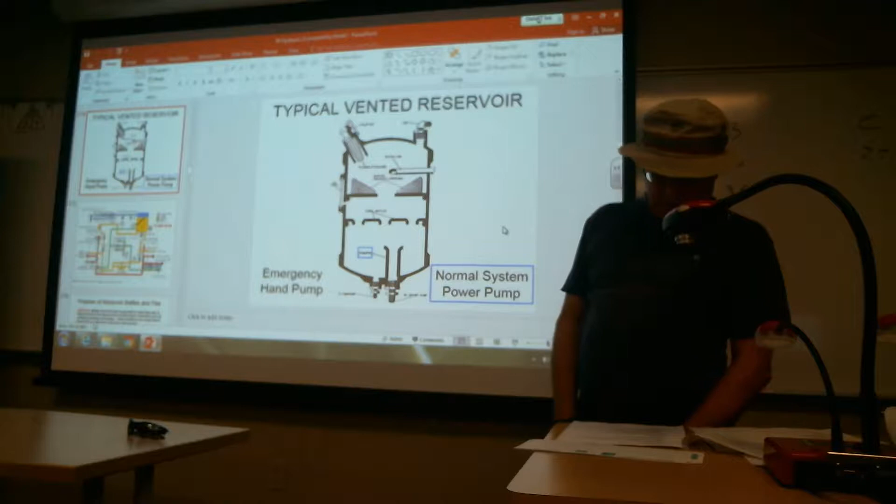27. Some gear type hydraulic pumps incorporate a feature which permits pump discharge fluid to be directed back to the pump. This feature should be for pressure loading. And is that pressure loading the bearings? It pushes on the bushings. Okay, so it's just, I just didn't know the name of it.

Okay, 46. Hold on the picture, what we got. Yeah.

A lot of the gear pumps have something, well, this is a Pesco pump anyway. What they do is they take the discharge of the hydraulic fluid, and then they've got a short bushing in the housing of the pump. The short bushing allows that discharge fluid to push directly on the bushings, and it loads the bushings against the faces of the gear. I got maybe a better picture of that somewhere here.

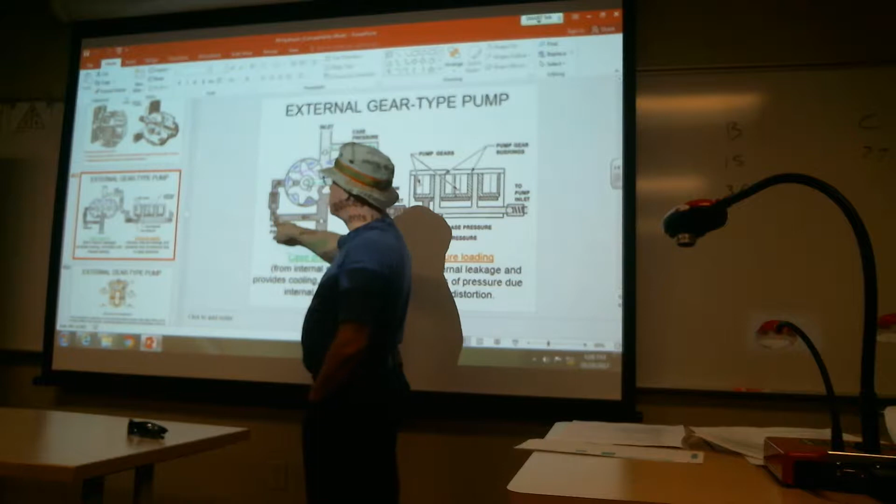So it's called pressure loading. Yeah, it's called pressure loaded. So like in this case, they've got the discharge fluid. What some pumps do is they have the ability to put the head on reversed 180 degrees. So in that case, they've got two check valves. This one allows the discharge fluid to push past the check and then push directly on the bushing. So what it's doing is it's pushing on the bushings against the gear faces.

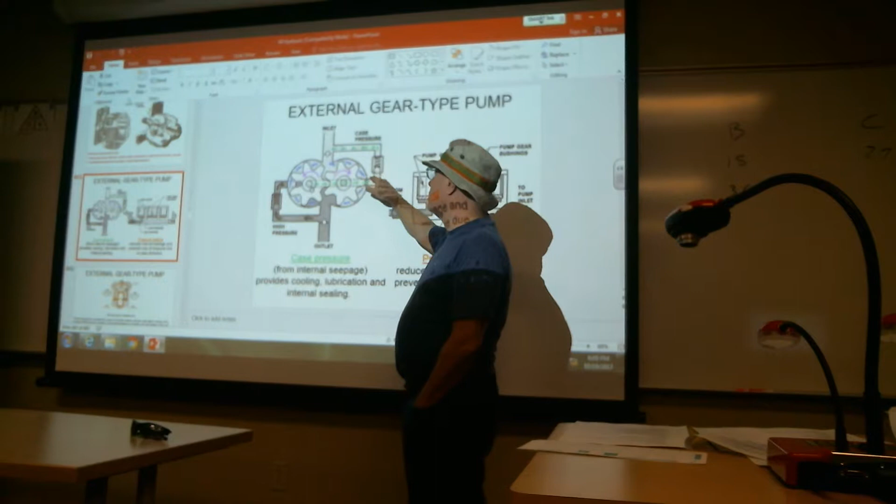The other feature that a lot of the pumps have is for another function called case pressure. We accumulate all the stagnant fluid from the clearances between the parts, and we expose that to a very weak spring check valve internally inside of the pump. This is usually no more than about 15 psi required to offset the ball, and then we divert that fluid back to the inlet. The purpose is to provide for cooling inside of the pump. So it's just an accumulation of fluid that causes that particular check to open.

So how come that question is pressure loading, not case pressure? It's asking about pressure loading. 27C, pressure comes from. Some gear pumps provide for pump discharge fluid to be directed back to the pump. So here's the pump discharge being directed back to the pump, so you're pushing on the bushings, just like they're showing here.

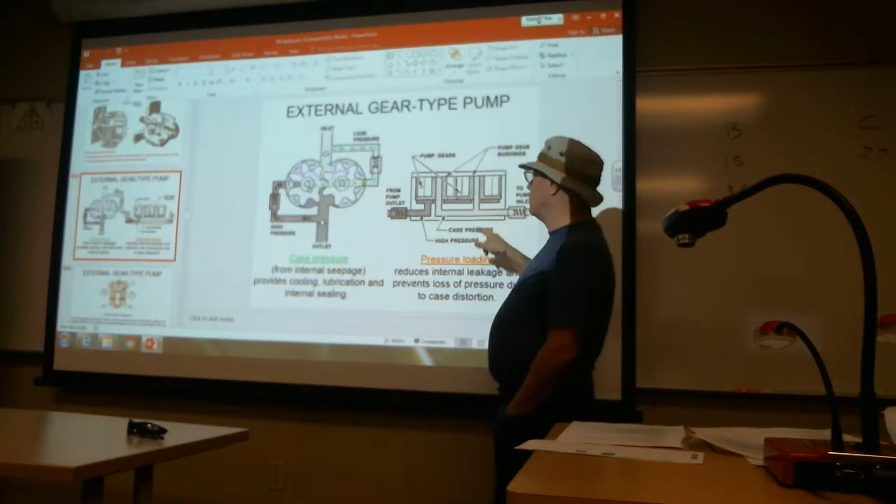There's an annular opening in a lot of the pumps that provides for that.

Number 46 on C. 46 on C. 46. 46 on C. 46 says the diameter in microns of which the largest spherical particle will pass through a filter under certain test conditions defines which filtration rating. That should be absolute. C.

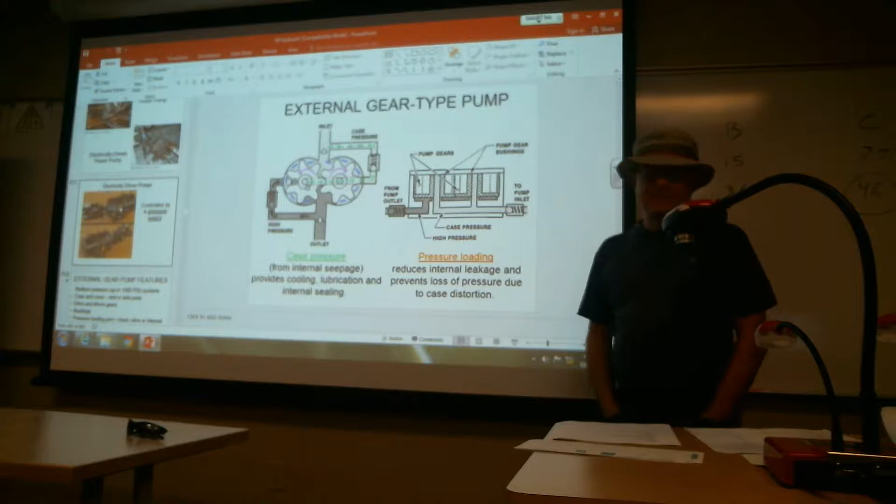It's wrong. Did I get it wrong on that? Yeah, circle it. You caught me. What do I got marked on the test as the correct answer? B. B. B. Okay, should be absolute. Once in a while I blow it too.

B25. What determines the minimum particle size which will be excluded by, or filtered by, a Cuno stack disc edge filtration? You've got a series of discs and spacers. The discs are, that's C.

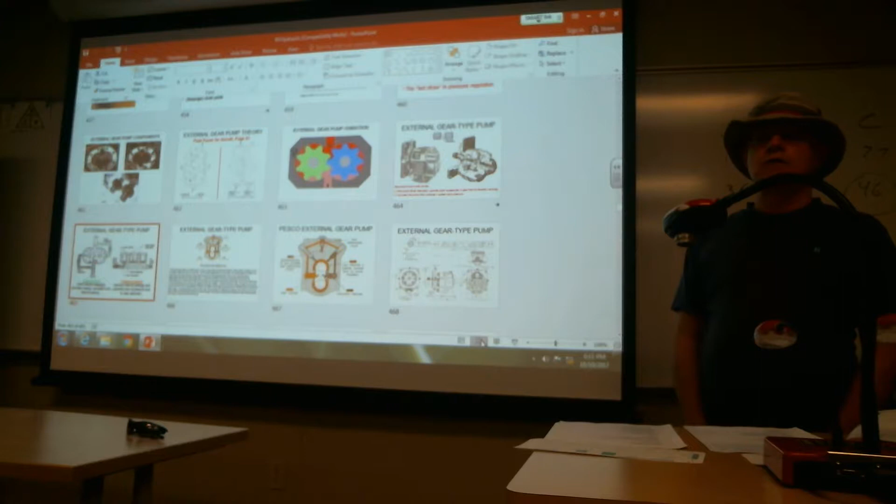I'm sorry? That's 20. Okay, so which question? It's 25. 25 on B. Oh, I'm sorry, 25. A worn hydraulic pump shaft seal can normally be detected by, they've got a seepage drain.

There's a lot of pumps incorporated with it. They've got four ports that are mounted at the flange of the pump, and these are really seepage drain ports. When you see hydraulic fluid leaking out of there, that indicates that the shaft seal is busted. So it'd be hydraulic fluid flowing from the pump drain port.

That would be it. You have D marked on that one. Let's see, 25? I remember. 25, oh, should be, yeah, C. Yeah, it is C. Never mind, I'm reading wrong.

Okay, like at 26. 26. Okay, question number 26 on C. Oh, so it's on B.

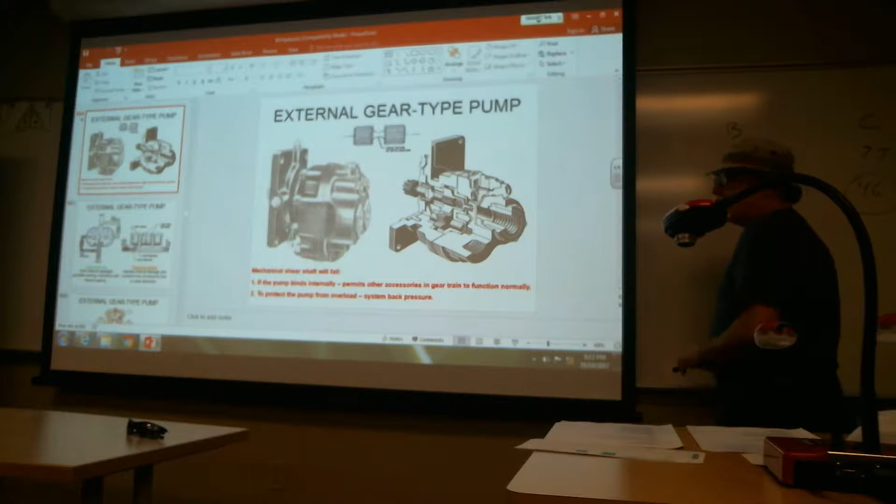B26. What determines the minimum particle size which will be excluded or filtered by a Cuno stack disc hydraulic filter? You've got a series of discs and spacers that are ganged on top of each other with a common rod. The spacers determine the degree of filtration. The discs separate it. So let's see if I've got that for you.

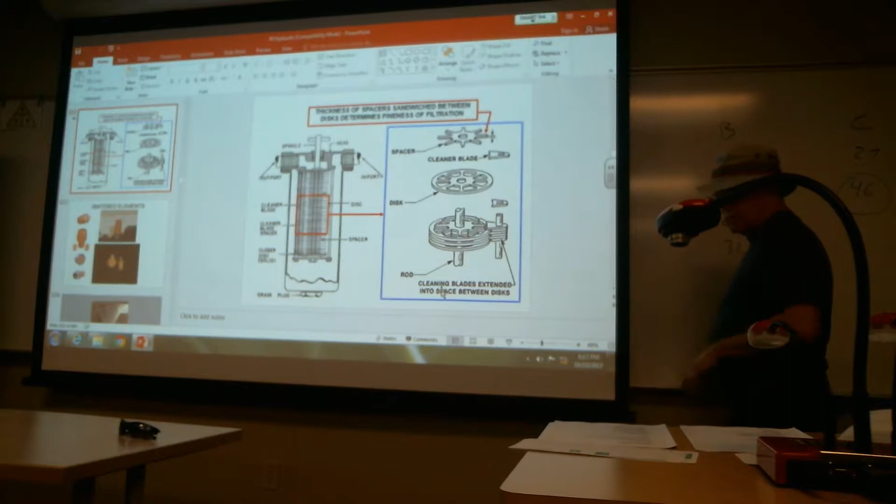You've got a series of spacers and discs. The thickness of these things really determines the clearances you have between the discs, and that's where the particles would lie. So they're razor thin, but nevertheless that lets you control it. What's the spacer? B32. BN32. B32.

Service valves having a high pressure valve core should be the AN812 and the 6287. I thought it was the MS289 — that one has no valve core, only a metal to metal seal. The 812 does not have high pressure in it... actually they're all considered high pressure service valves; the 1500 was the low pressure one. They have different features though: two of them have valve cores, two also rely on a metal to metal seal, but only one has both. The 6287 has a metal to metal seal and a valve core. The 812 and the 6287 both have valve cores.

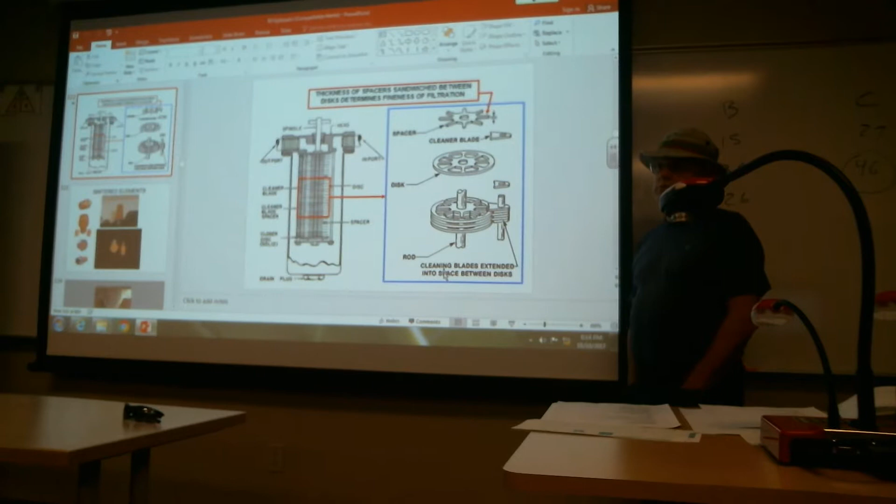47 on C. Before removing the filler cap of an air pressurized hydraulic reservoir — 47 on C, sorry, I got B. Sorry, 47 on C.

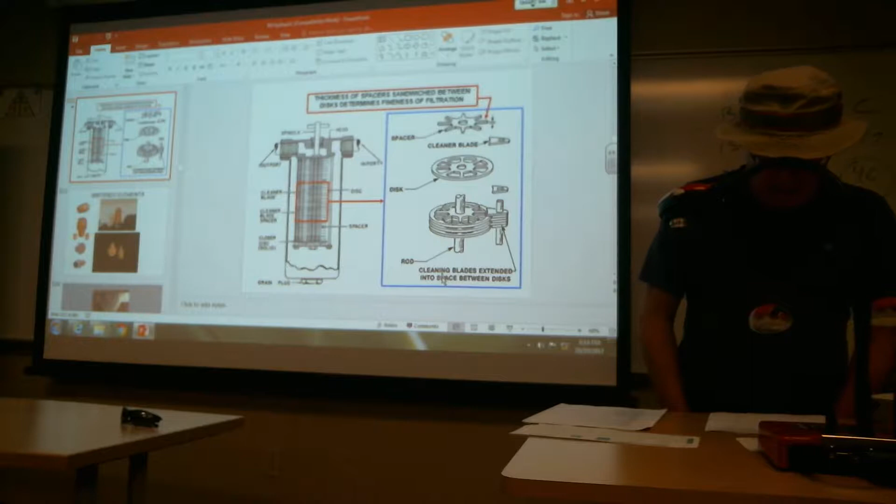47. The case drain of a variable displacement pump provides for heat exchange. The other type of drain you might have on a pump provides circulation of hydraulic fluid back to the reservoir — that's the case drain. A lot of variable displacement pumps have three ports: one is the inlet from the reservoir, another goes into the hydraulic system for the pressure manifold, and the third port goes back to the reservoir. That's what they call the case drain. Let's see if I've got a picture for you.

Let's find — I think you've got another picture somewhere here for you. Number 20, C too. 20, which one, on C? C20. 20 on C.

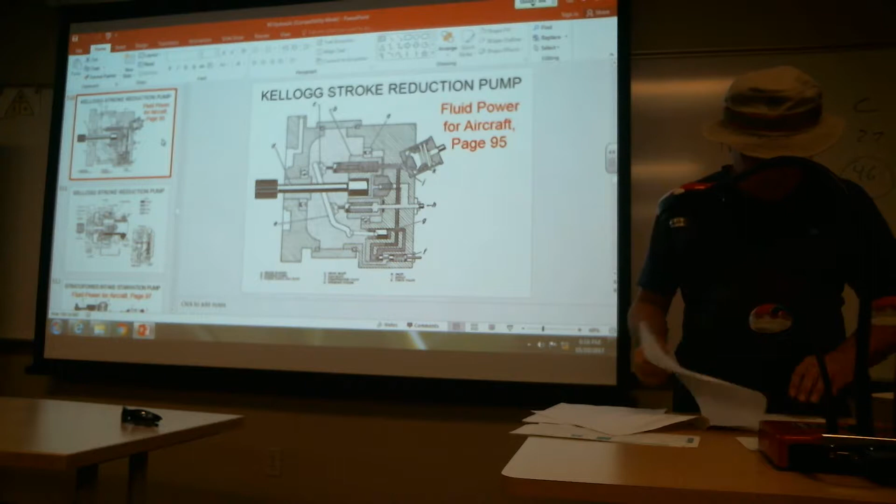C20. Last chance filter — wouldn't it be found in the reservoir too? No. They've usually got either a micronic type filter or a metal mesh filter. The last chance filters are micronic in nature, but they're usually positioned inside servo valves and actuators. You'll never see them in the field. When they do an overhaul of a power control unit or servo actuator, that's where they're found.

Which other one? 3 on B. Sure. B3: what happens to the output of a constant displacement hydraulic pump when the hydraulic pressure regulator diverts the pump fluid from the system to the reservoir? Understand that the volume is still coming out of the pump, but what we've done is taken the discharge of that pressure and reverted it back to the reservoir.

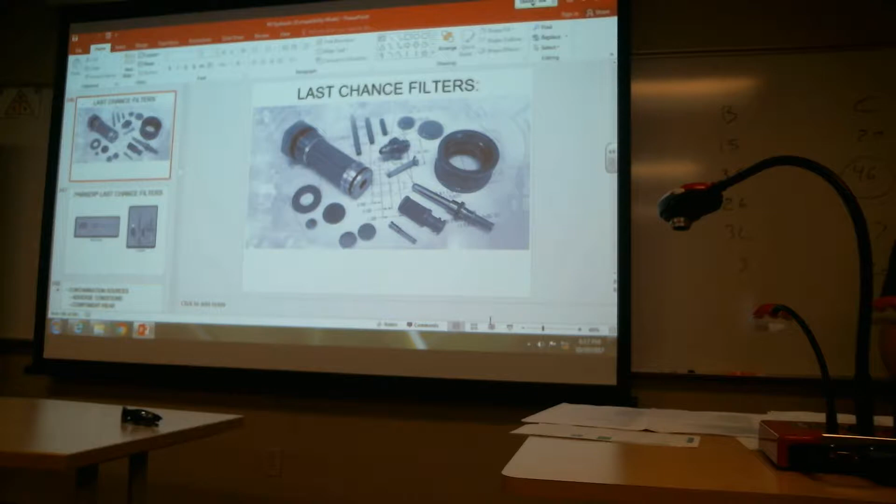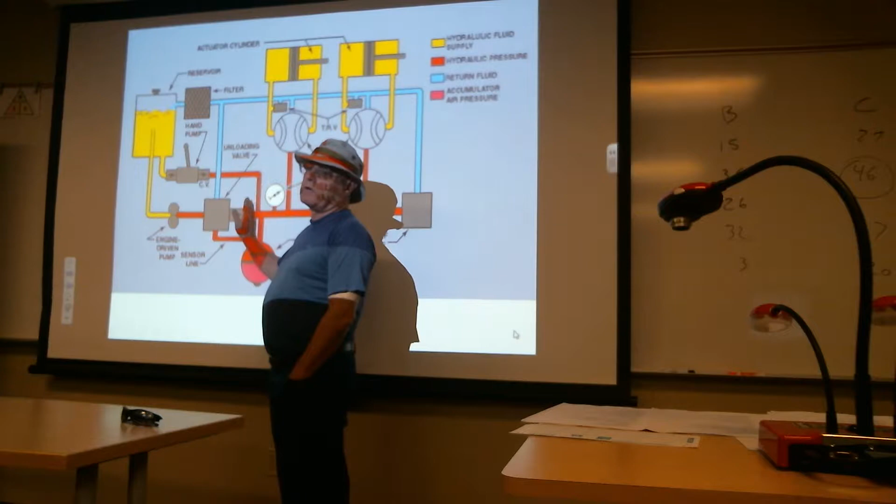So in the kicked-in position for that unloading valve, the pump is actually seeing pressure and you're diverting flow through the unloading valve into the accumulator to build pressure. However, we can't stop the engine-driven pump, it's being driven through the accessory drive of the aircraft engine. So at some point, we have to divert the flow from the pump back to the reservoir. We've reduced the discharge of the pump to 0 pressure, but the volume is still present and coming out of the pump, circulating back to the reservoir. Past this point, we've trapped the pressure past the unloading valve. That's what they're getting at in the question.

21 Bravo. 21 on Bravo. 21 on Bravo.

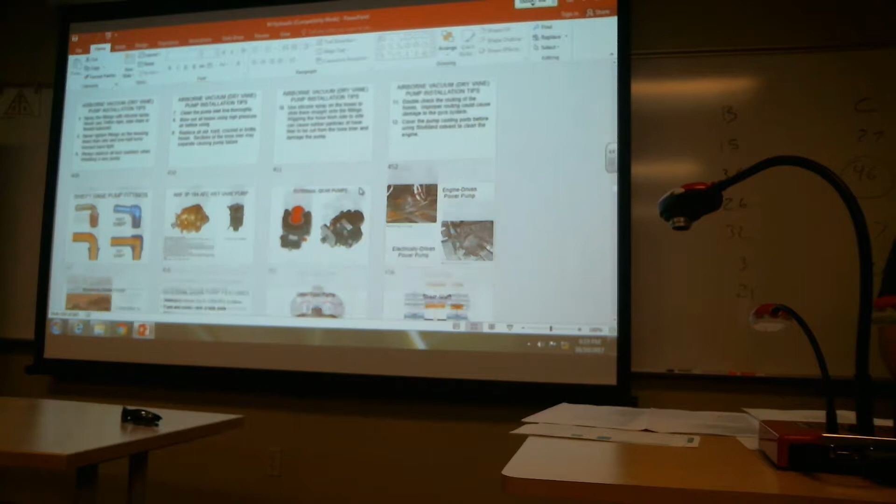21. Reservoirs may have a check valve installed in parallel with the vent to the filter. This is used on the Grumman aircraft landing gear mock-up we have in the shop. They use it in vented reservoirs to allow a large slug of hydraulic fluid coming back to the reservoir to enter as easily as possible. The purpose of the check valve is to expel the air contained in the top of the reservoir, because the filter acts as too much of a restriction to get the air out.

So let me show you a picture. Some filters. Reservoir. It'll be in the vented section of them. If we can find it here. Here we go.

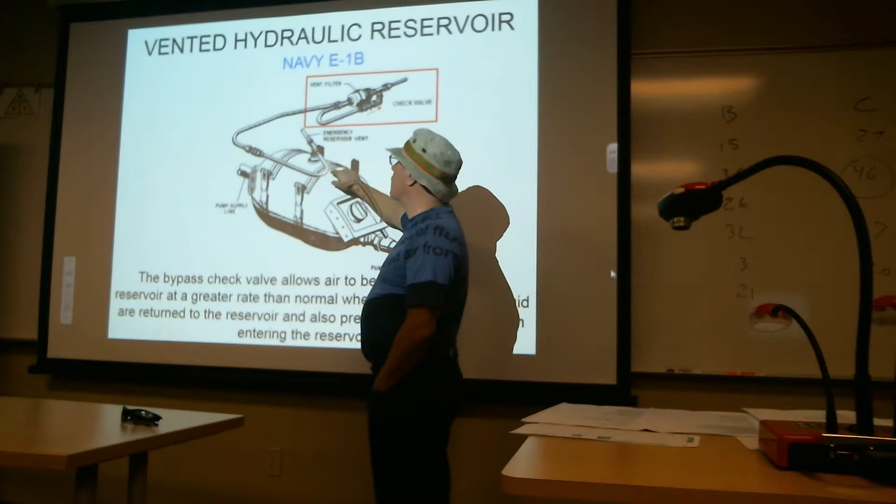So you've got the reservoir positioned here. This is the filter that's in the vent line, so air can go through it, but not necessarily freely. Obviously, the purpose of the filter is to allow filtered air to get into the reservoir, that's not a problem. However, there's a big problem when you have a big slug of hydraulic fluid trying to get back to the reservoir. Whatever air is inside here is going to impede that flow. What we've done is install a check valve that allows the air inside this chamber to vent itself freely. Rather than fight through the filter, which is a restriction, there's a pathway around the filter that lets the air get out. Grumman does it, other manufacturers do it too, I'm sure, but that's why they do it.

If it didn't have that, you'd just put pressure on the pump. The fluid, when it gets back to the reservoir, creates back pressure in the return line, in the return manifold. Because the return portion of the system goes back to the reservoir, you're now adding pressure into the return line going back to the reservoir that you don't necessarily want.

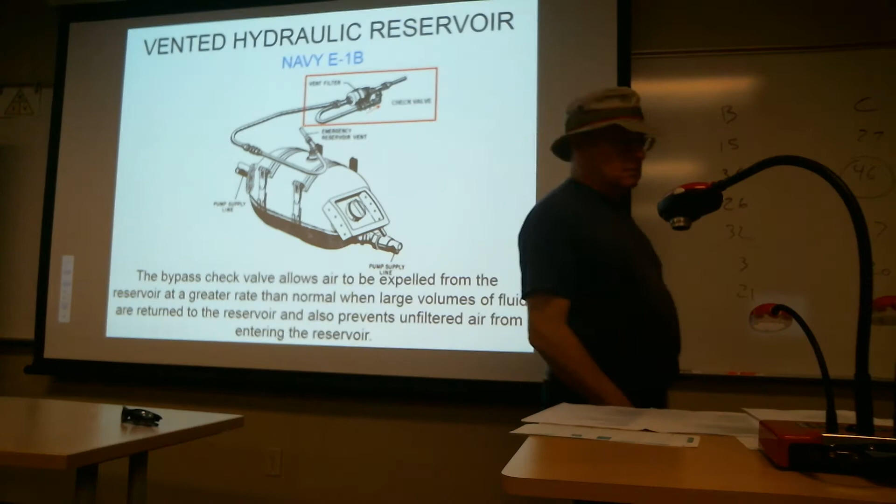43, see, 43 on C. 43. C 43. 43C.

43. Self-displacing accumulators have how many chambers? They've got 4. It's a modification of a piston type accumulator that gives you a storage chamber that will work as a reservoir. It's got a vented chamber as well.

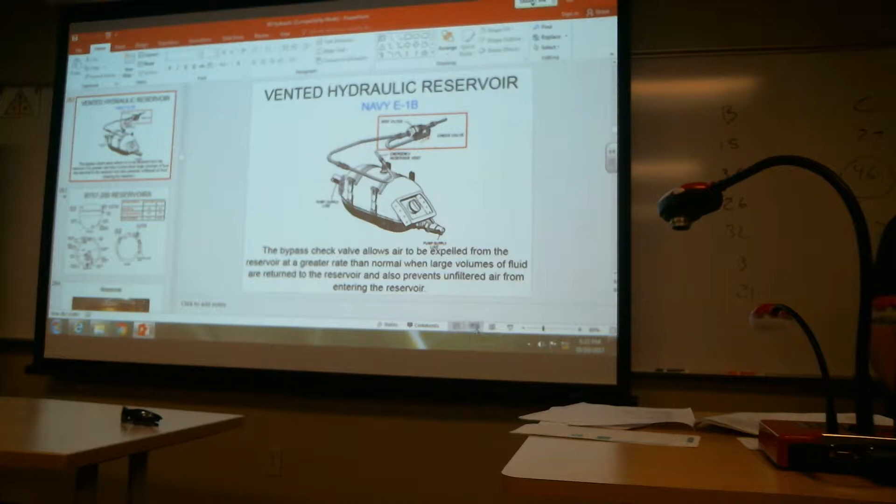Let's see if I can find you a picture. Okay. Inside that accumulator, there's actually 4 spaces. They have a piston that looks like an H in cross section. They've got a gas chamber that's pressurized, just like a regular piston accumulator. They've got a high pressure fluid side, just like in a regular accumulator. Because the piston is oddly shaped, as it goes back and forth there'll be a chamber that varies in size to accommodate fluid, working kind of like a reservoir. And then one chamber that is really a vented area on the accumulator.

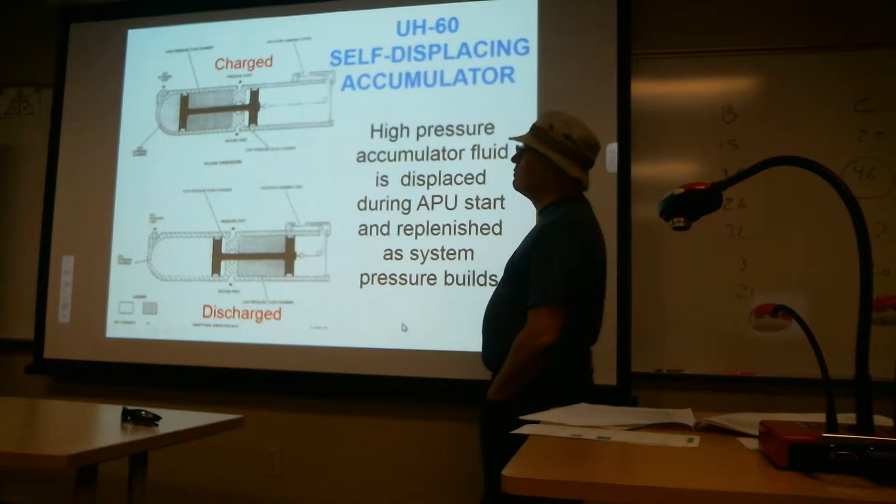To show you the cross section, this is what it looks like in 2 extreme positions. This shows it charged with hydraulic fluid against the gas charge. When the hydraulic system was in operation, we built up system pressure. The fluid came in through the pressure port and reacted against the gas charge on this side of the piston, shifting the piston this way. At the same time, there's a vented chamber open to atmospheric air, but the return side of this piston has no fluid in it.

If we use this as an accumulator to make an actuator work or a hydraulic motor, you're going to be pushing this fluid out. It's got to go somewhere. So obviously, with a regular hydraulic system, that fluid eventually goes into the actuator and is returned back to the reservoir.

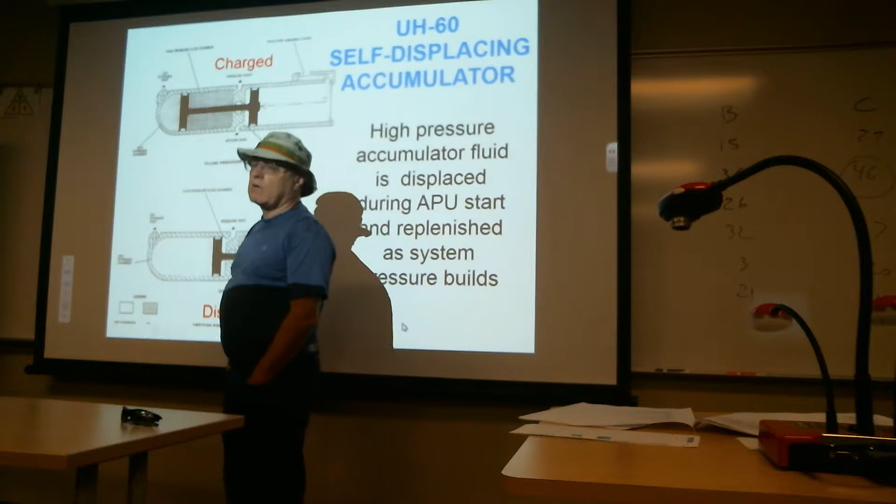But some aircraft don't have a big enough reservoir to accommodate that fluid. So what they do is route the fluid on the return side back to the cavity in the accumulator itself. As the piston is being forced forward, displacing its fluid, the recovery of the return fluid ends up going into that chamber. Does that kind of make sense?

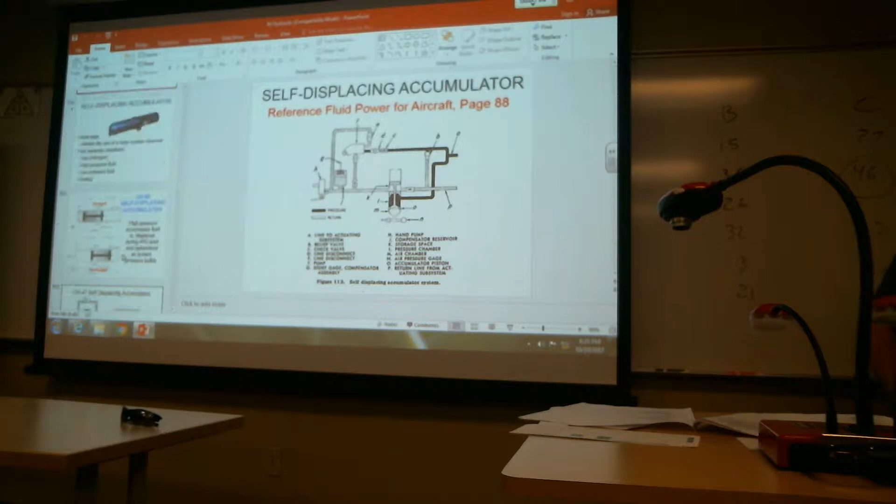Thank you, Joe. Sure. What other questions you got?

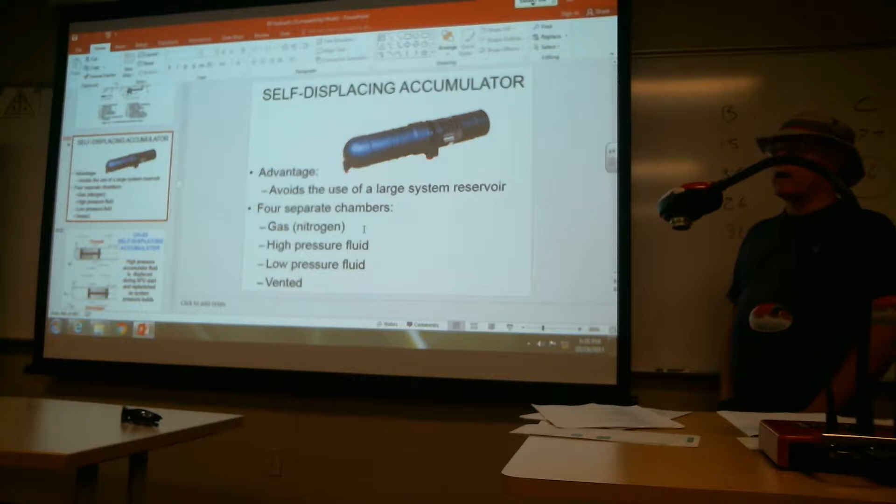On all of the pneumatically pressurized reservoirs, there's some method to remove the air before you remove the filler cap. On the Convair reservoir you have out in the shop, they've just got a spring-loaded poppet. You push that poppet down, that releases the air pressure in the reservoir. Some Boeing aircraft have a plunger that relieves the air pressure on top of the fluid before you open the cap. Any of the others?

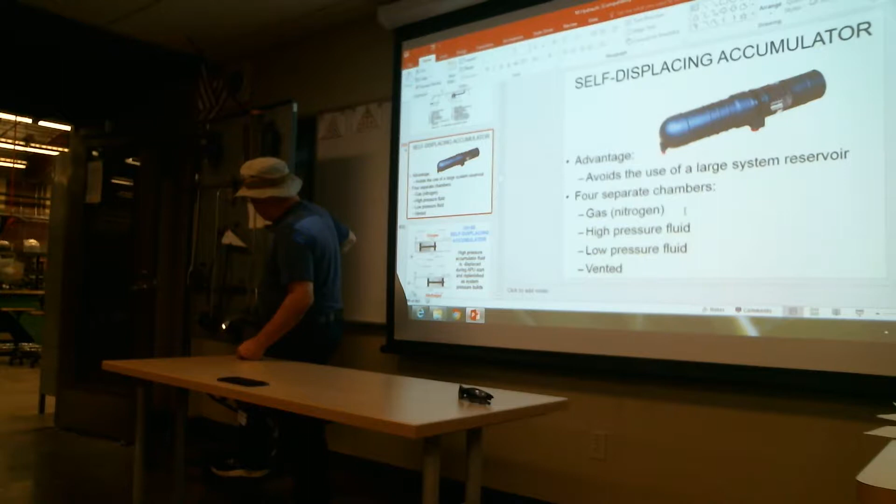This is the reason I brought the mock-up, because sometimes it helps to see what happens. We're getting up to get some fluid into the accumulator, and all we have to do is operate the hand pump to send fluid against the gas charge that's there. Technically, the accumulator is charged.

Is it charged to whatever value we want? No. You certainly don't equal the gas charge that's inside of the accumulator. What you've done is just added a little bit of fluid to get fluid inside of it. So it's technically charged. Okay.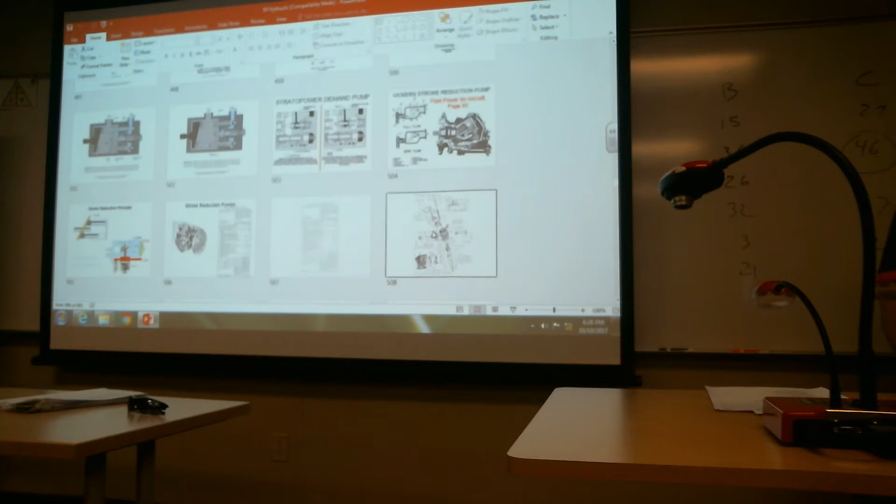So what do we do in order to control pressure? I'll show you a few different things that we can do. Let's see what we can start at here. Let's start right at the very beginning with a really simple hydraulic system.

You've got a reservoir, an engine-driven hydraulic pump, a device called a relief valve, and downstream of it we've got hydraulic pressure being developed in the line going to selector valves. When you operate a selector valve, what you're doing is diverting the flow of hydraulic fluid into an actuator.

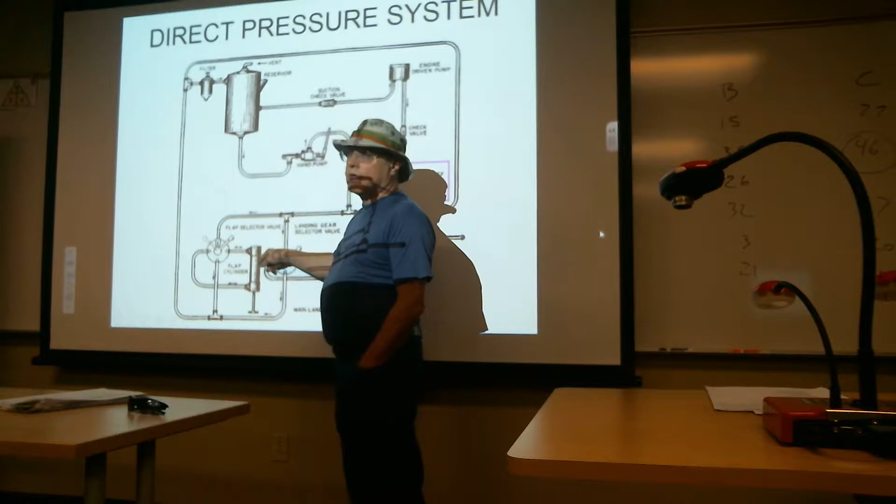At the same time, when the handle has been positioned one way on the selector, the fluid that's on the other side of the piston is being sent back to the reservoir through the return manifold. So, no problem. What's controlling system pressure in this case is a relief valve.

In its simplest form, it's really nothing more than a big ball under a big compression spring. The fluid comes in and pushes against the ball, compressing the spring, and we're fighting that relief valve in order to develop system pressure in the line. Any fluid flow the pump is producing in excess of that is diverted back to the reservoir.

So we're holding a particular pressure in this pressure manifold, monitored by the gauge, simply by allowing a certain amount of fluid forced by the pump discharge to build pressure in the line. Anything in excess of that is sent back to the reservoir.

Understand something very important for the illustration. The pump is fighting to keep that relief valve in a position of partially open, because you're compressing the spring against the ball. So the pump is fighting.

Is this okay? The answer is maybe. If it's a low pressure type of system, it's not going to produce a tremendous amount of wear on the pump. For example, we use something very similar to this to control the pressure for a constant speed propeller.

Many constant speed props have a governor used to control the pressure required for changing the pitch of the propeller. It's pretty simple, but understand the pressures required for changing pitch on the prop, using engine oil as the fluid for changing pitch, are maybe 150, 200, or 300 PSI that you're trying to control.

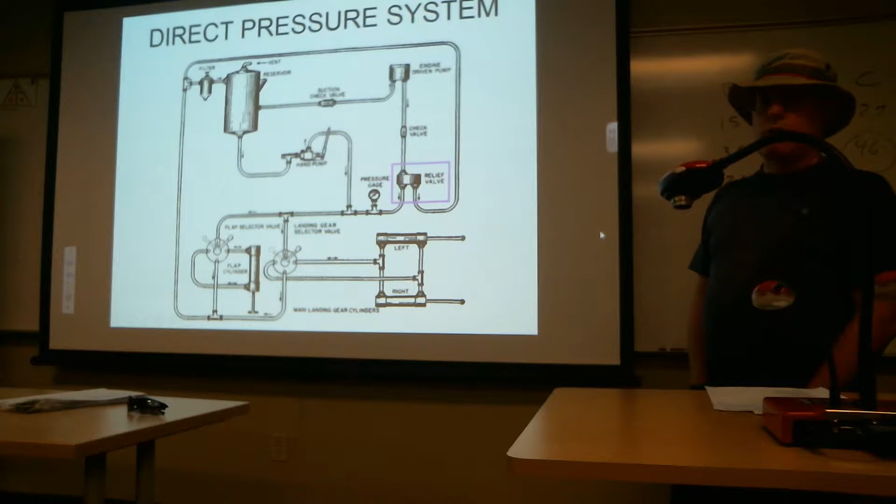Okay, fine, we've got a relief valve in the circuit, but it certainly doesn't unload the pump. Even when the relief valve is controlling pressure, the pump is fighting to keep that relief valve throttled to a partially open position.

Well, this is what they used to do in the old days in order to make actuators work and control system pressure. They had a system called a direct pressure system. What they did was install a plunger type of valve called a power control valve, and used with it is another device called a surge cylinder. This is a semi-automatic method of controlling system pressure.

When the power control valve is in its open position, fluid flow from the engine-driven hydraulic pump just circulates naturally back to the reservoir. However, when you want to build up system pressure, the pilot or somebody in the crew has to push on the plunger, this power control valve. That blocks off the return flow back to the reservoir, and now the fluid under pressure is forced to go through the relief valve and also into the selector valve to make the actuators work.

At some design pressure, this power control valve poppet or plunger will pop itself back out again, and then the flow is established back to the reservoir. So that's why I kind of call it semi-automatic.

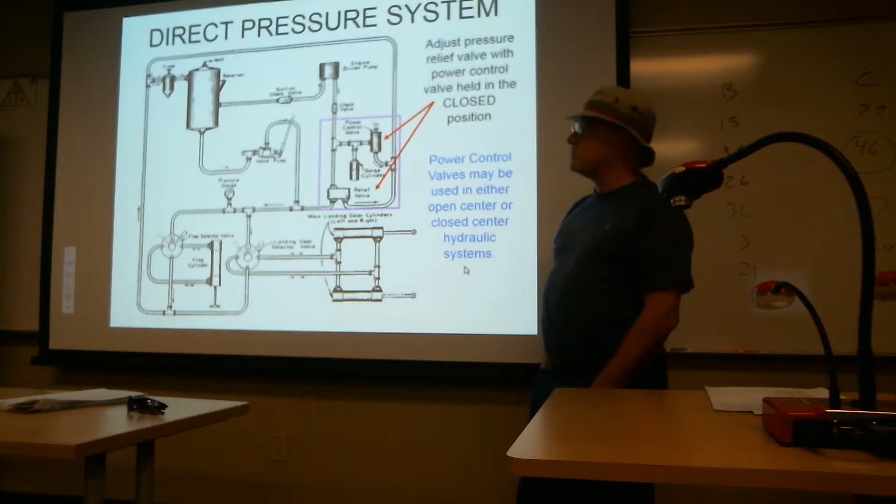This makes life much easier for the pump. The pump probably won't fail as soon as other types of systems where we just build and hold pressure. It's far better than having just a relief valve modulating itself open and closed to control pressure, because the pump never gets a break. Does that make sense?

There's an FAA test question, kind of an obscure one, that still asks about this type of system. They want you to be able to adjust this system, or adjust the relief valve for its opening point. Obviously, to adjust the relief valve for the point at which it opens, you're going to have to manipulate this valve and hold it in the closed position, then look at the system pressure gauge to figure out at what point this valve is going to open.

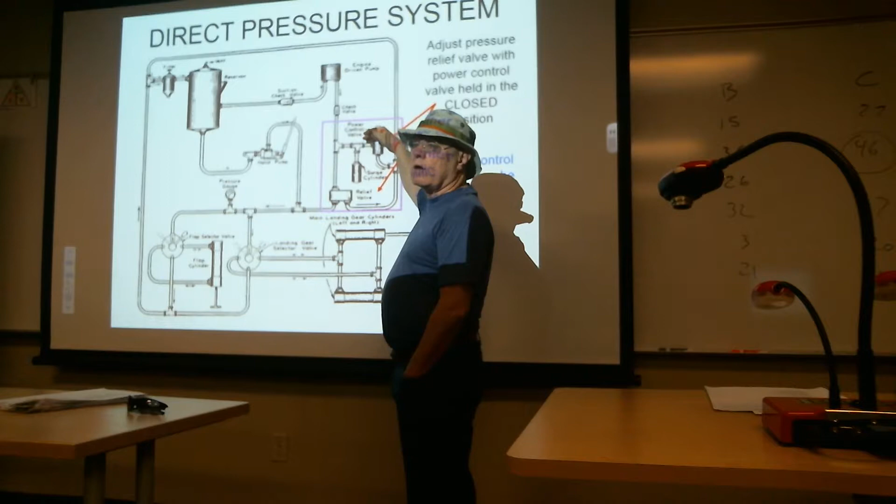So obviously, this device opens at a lower pressure than the relief valve is set to open at — by its very nature, you're going to use it as a safety device. But to tell what point the relief valve opens at, we have to momentarily disable this device by holding the plunger in. When we hold the plunger in, and physically hold it, we build up enough pressure to allow the relief valve to open, and we can verify its point of opening by looking at the system pressure gauge.

So the FAA test question says: adjust the pressure relief valve with the power control valve held in the closed position. Again, you're going to have to hold this in the closed position and keep your hand on it.

We're going to allow the pressure to build up to the point where the relief valve opens. You can see that pressure by looking at the gauge in the circuit. Does that make sense to you?

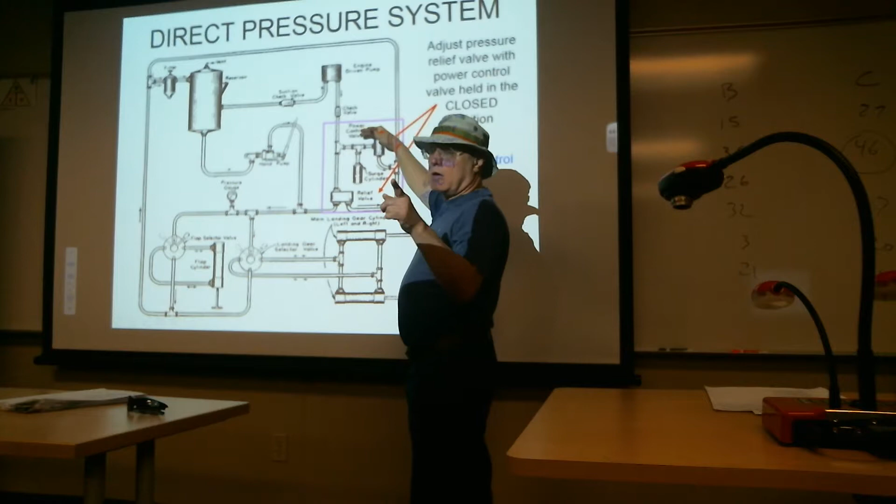Question: do you have any examples of a system like this in an aircraft? Old ones, you'll have to go back to the 1930s, really old. It's too simplistic for modern aircraft, even those built in the mid 1940s. You had one or two hydraulic components you were trying to make work, and that's about it.

But if you've got multiple components, we don't want to use that power control valve just to control pressure. We want something better for controlling pressure and to unload the pump as well, like an unloading valve. That's where we're going. Is there a spring that works against the plunger?

Yes. If you want a close-up view, you've got this picture in your fluid power book. This is one reason I use that book, because it covers some really obscure things. This is a picture I stole directly from it. What it's got inside is the plunger, shown in both positions. The system pressure has to work against this poppet or plunger.

There's a spring on top that holds it in one position. When the pressure builds up, it pushes the plunger out, and the fluid flow from the pump is directed back to the reservoir. In its closed position, you're just blocking the reservoir. But understand, this device alone isn't enough to guard you against a spike in pressure.

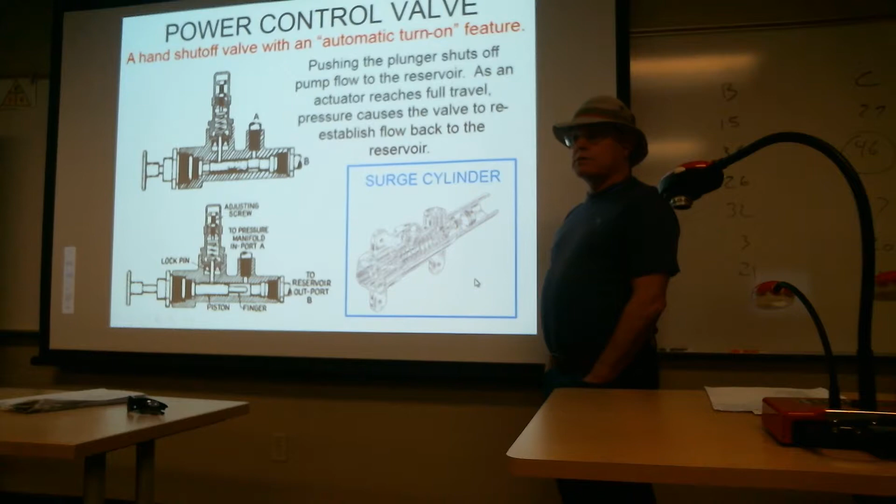You're going to need a surge cylinder also. I don't know if your fluid power book has a picture of this, but I stole it from another text. This has just got a big spring in it with a piston. What it does is prevent this thing from switching to the open position too quickly, so when a surge of hydraulic fluid develops, it holds it in the closed position.

There used to be a really obscure FAA test question asking what the purpose of that power control valve was, and it says: the hand shut-off valve with an automatic turn-on feature. Really what it does is shut off the reservoir and then automatically turn back onto the reservoir when the pressure builds up. But that's the purpose of the power control valve, right?

Does it unload the pump? The answer is yes. Is it completely automatic in operation? No. So it allows us to develop a particular pressure, and it does unload the pump, but it's not automatic.

What's a better thing? We're now going to use a device that's pretty much all automatic, called an unloading valve. We're still going to have a relief valve in the circuit as a backup in case the unloading valve fails to go to a position called kicked out. But we won't be damaging the pump by continually having back pressure felt at the discharge of the pump. Once we build up pressure, the unloading valve senses that pressure and diverts flow from the pump back to the reservoir.

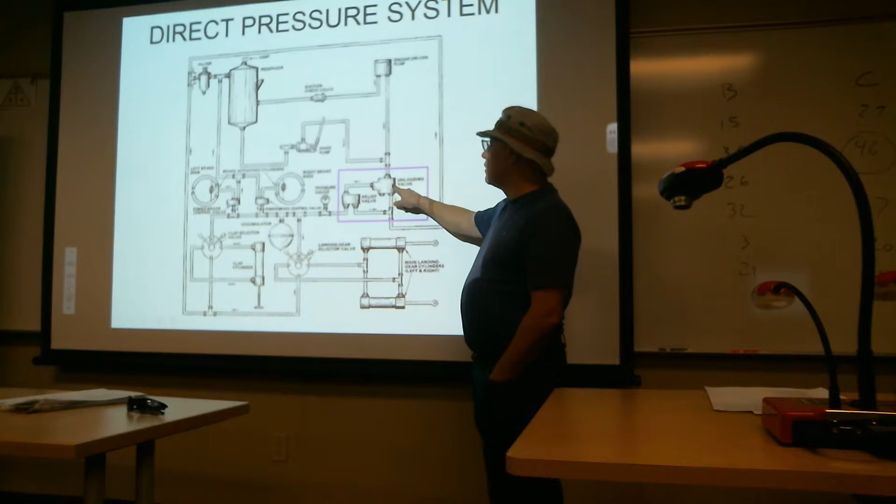So take a look at it: you've got all the same components as before, but a little more sophisticated. You've got a reservoir, the same engine-driven pump, and an unloading valve. The unloading valve works similarly to the relief valve, except it's called an unloading valve because it takes the back pressure off the pump discharge once system pressure has built up downstream. At a certain point, the fluid flow goes through the unloading valve, unrestricted, finding a path back to the reservoir.

So it's automatic. We're still going to need a relief valve in the circuit as a backup. If the unloading valve fails to divert the flow back to the reservoir at the correct time, the relief valve will control system pressure. But notice also that the relief valve does not unload the pump.

When the unloading valve has failed, the relief valve will control system pressure to a value above the unloading valve point of pressure. However, the pump is fighting to keep that relief valve open. So it's just meant as a stopgap measure, necessary to a point where we can replace the unloading valve. But we need it. We need to have that in the event that the unloading valve fails.

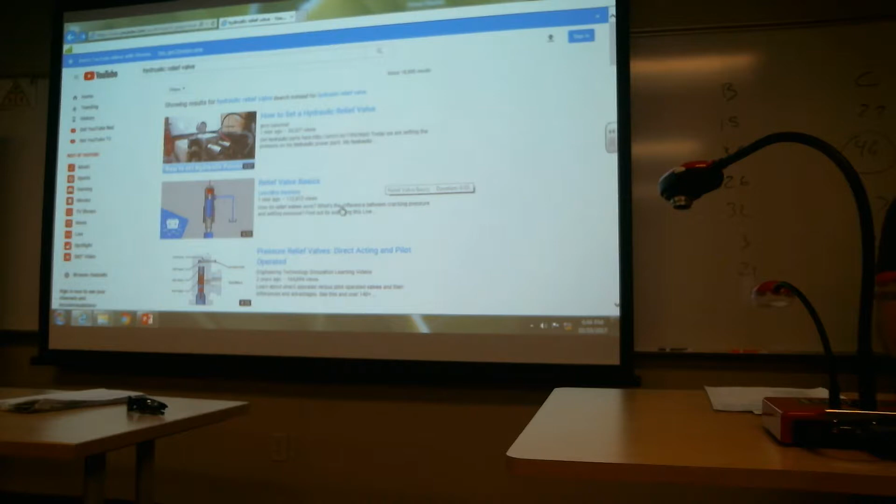Okay, all right, so that's kind of where I wanted to go. Even before we get there, during your exam I had a chance to take a look on YouTube, but I didn't really have an opportunity to listen to the audio being presented. Maybe just something really simple on relief valves, on what they do. Let's take a look at this real quick.

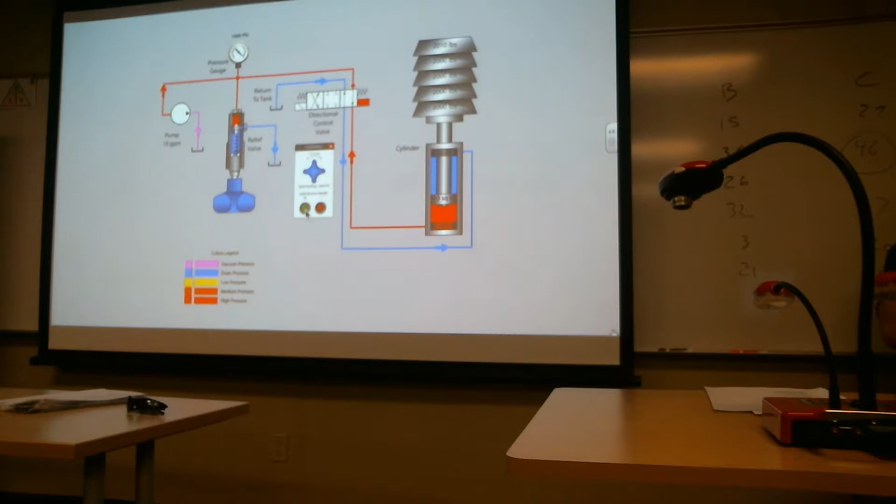In future videos, we will examine pressure override in more detail and look at more complex relief valve designs. This is kind of important to note too.

Regardless of that relief valve setting, if you've screwed the relief valve spring all the way in, the pump is under load. You're not really controlling the discharge of the pump to the point where it's unloaded. If you put a lot of compression on that spring, whatever pressure builds up in the line might be enough to actuate the actuator. But that pump is working against that relief valve to hold it open. So you may be sending fluid back to the reservoir, but the discharge of that pump isn't helping it, and it eventually will cause the pump to wear out.

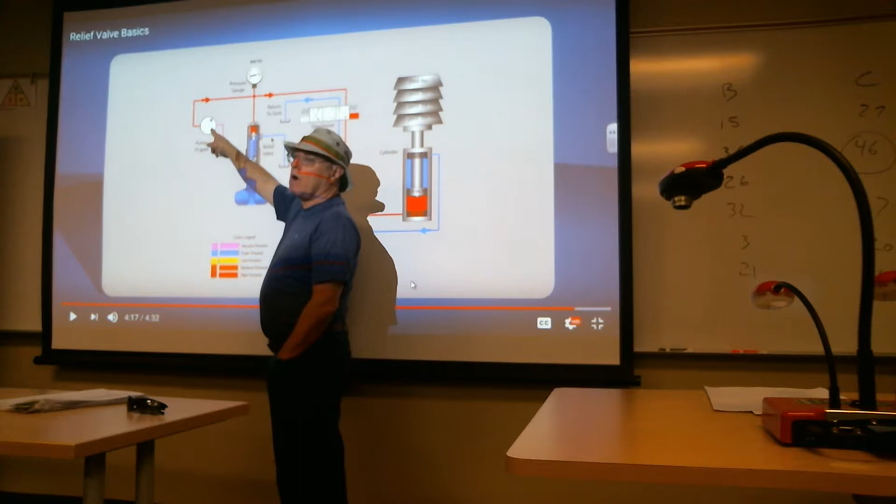So this is the reason why we need to have an unloading valve in the circuit. Y'all kind of see that? Okay, all right.

Here's a more sophisticated system that we might have. You've got an unloading valve in the circuit designed to unload the pump. You've got a system relief valve that works as a backup in the event the unloading valve fails to control pressure. And we've also got other valves called thermal relief valves, abbreviated TRVs. They're kind of like miniature system relief valves, but designed to protect the actuators. And I've got to remember to raise the board.

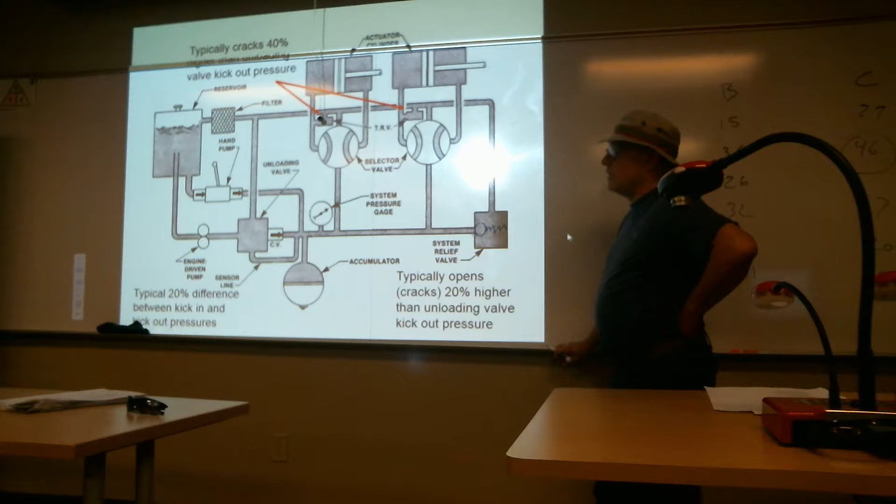So if we were to do something like this, you can kind of envision what's happening with the relief valve. In its simplest form, it's a spring against a ball. The unloading valve is much more complex - there's a balance of pressures and forces used internally.

In one particular position of the unloading valve, flow from the reservoir goes through the pump and in through the unloading valve, then begins to build system pressure by confining the fluid inside the pressure manifold. This is the position of the unloading valve that we call kicked in. So in this position, the flow from the pump is being diverted into the pressure manifold, and we build it up to a certain point.

The other point the unloading valve has is called the kick-out pressure. At the kick-out pressure, we're going to divert the flow from the pump back to the reservoir. Past this point, past the check valve in the circuit, you're going to hold pressure in the pressure manifold and in the accumulator. But what this has done for you is it's now unloaded the pump, so now the discharge of the pump is circulating back pretty much unrestricted.

This is desirable - it'll prolong the life of the hydraulic system, particularly the pump. So it's not like using a big spring and a ball to control system pressure. You're working internally against components or piece parts inside the unloading valve to hold it in the kicked out position. I want you to take a look at the picture as well - there's a helpful device that holds the unloading valve in the kicked out position, and I think you can guess what it is: the accumulator. The accumulator works just like a battery in an electrical circuit.

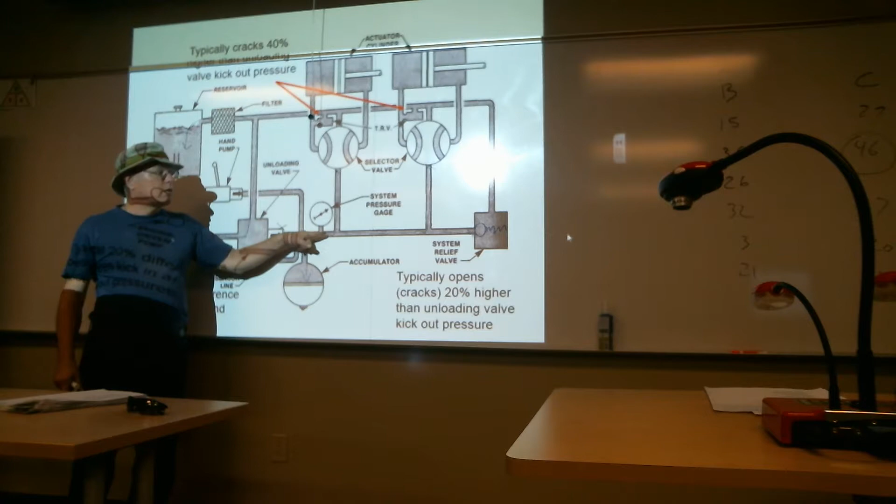So let's assume we're in the kicked out position and we've got flow going back to the reservoir from the pump. You've now built up pressure in the pressure manifold. When you operate a selector valve, what you're really doing is bleeding the pressure out of the accumulator, and then making the actuators work. The fluid flow comes out of the accumulator into the pressure manifold, and then the actuator works. The displaced fluid from that pressure manifold eventually goes back to the reservoir. But really, you're using the accumulator in the circuit to do that - it's like a battery in an electrical circuit.

Eventually, you push out enough fluid from the accumulator that the unloading valve sees it as a drop in pressure. At that point, the unloading valve replenishes the pressure in the accumulator and goes back to the kicked in position. Eventually, the unloading valve will go back to the kicked out position once pressure has been built up. This is a desirable feature we need - some kind of stabilizing device that prevents the unloading valve from switching back and forth between kick in and kick out too frequently. The accumulator helps prevent the unloading valve from flip-flopping between kick in and kick out too quickly.

So just like you have a voltage regulator in an electrical circuit with mechanical relays, three relays inside of it, this does the same thing. What it does is it prevents this unloading valve from working itself to death.

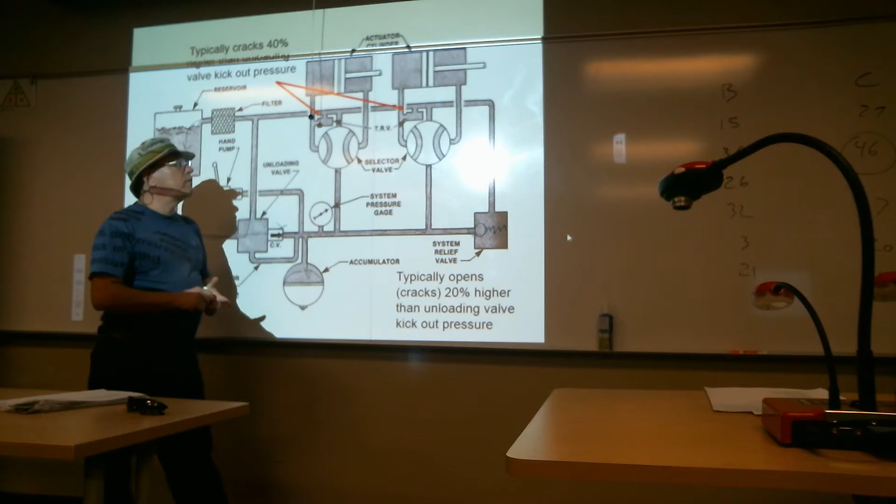So this is what we have, the TRVs, the thermal relief valves. The thermal relief valves are a miniaturized version of the system relief valve. If the selector valves are in the off position, and this is a closed center hydraulic system, there's the potential that fluid trapped in the actuating lines or inside of the actuators will begin to thermally expand. If there's a source of heat energy next to the actuator, that heat will cause the liquid to expand, and if there's nowhere for it to go, the pressure builds up beyond the extreme point.

So what we have to do is vent that fluid out. We have a valve called a TRV, and really all it is, is another tiny little ball but with a really heavy spring. The idea is that the fluid should thermally expand, and all it takes is just a drop of fluid to go by the valve and the pressure will subside again.

But it's a necessity. If the valves are in the off position as they are now, there's no natural return path for that fluid to escape. So what we need to do is incorporate those devices as protection for the actuating lines and also for the actuators themselves.

Remember also, it really isn't directly heat. Although they're called thermal relief valves, it isn't really heat directly that's causing the valves to open. It's the consequence of pressure buildup as a result of fluid expansion from the heat that makes the valve work. Does everybody kind of see that?

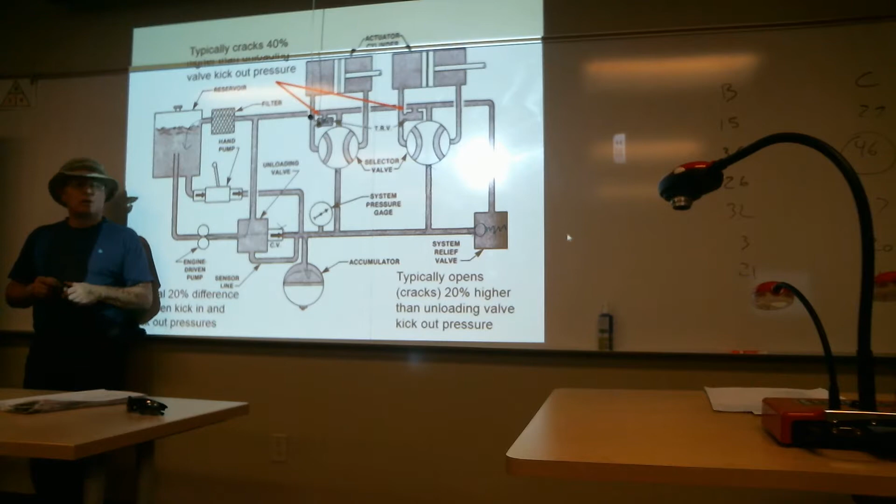If you were to kind of freeze frame the system relief valve, if the unloading valve had failed, let's say this thing is stuck in the kick-in position, this thing is going to be chattering itself to death because a slug of fluid is going to be going by it, the pressure goes up, the spring compresses, the ball comes off of its seat, the pressure subsides, the ball comes back on its seat, and the process repeats itself so repetitively that eventually the relief valve is going to wear itself out.

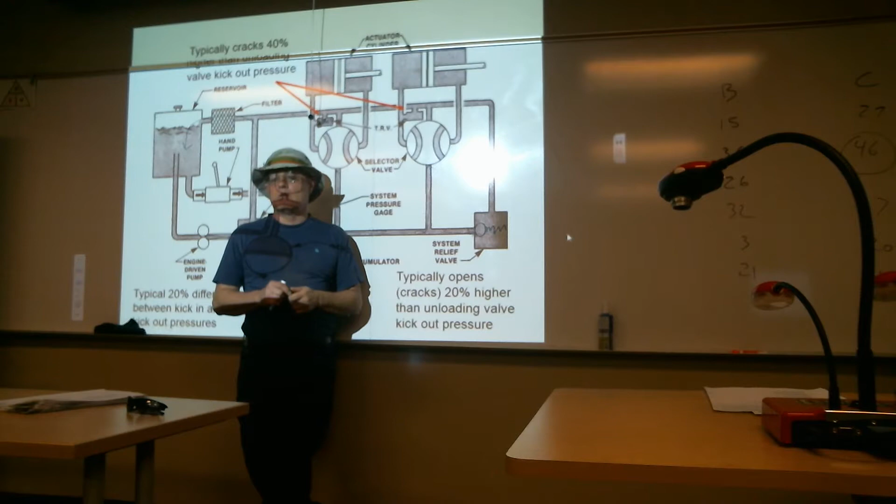But again, the system relief valve is a stopgap measure in the event that the unloading valve sticks in the kicked-in position. We have to have it. So that's how it works. I've given you some generic values for operation of the system as well. There's usually a range of operation for the unloading valve that's designed to work in.

So let's say we've got a kick-in pressure of maybe 800 psi. Once the pressure goes down below 800, the unloading valve will go to the kick-in position in order to build pressure back up. And we've got what we call a kick-out pressure of maybe 1,000 psi. So the unloading valve kicks out at 1,000 psi, but the pressure's got to drop in the line to maybe 800 psi before it goes back to the kicked-in position. So we've got a differential of maybe 200 psi, about a 20% difference in pressure between the two.

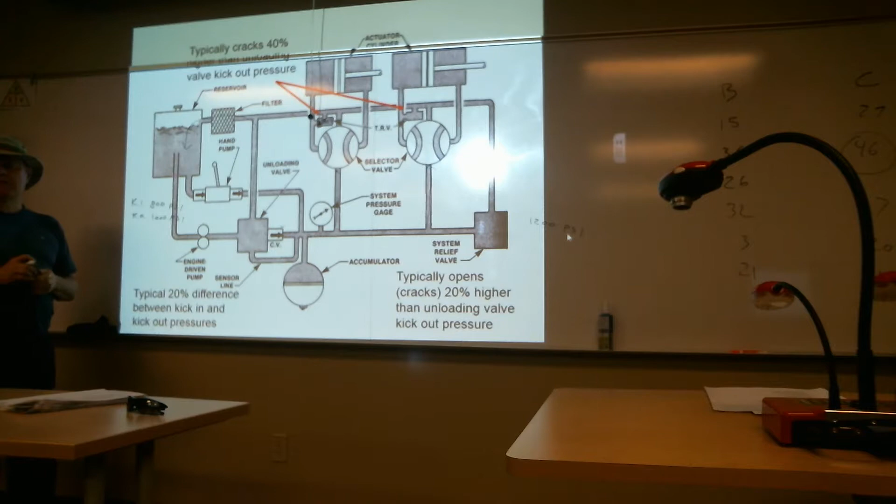The relief valve is designed to open as a backup, so its point of opening has to be higher than the kick-out of the unloading valve. So we might have the cracking pressure, the very point at which the relief valve opens, set at maybe 1,200 psi, about 20% higher than what we had for the kick-out of the unloading valve. But again, by its function, it has to be set to open or crack itself open at a pressure higher than the kick-out of the unloading valve, so again, about 1,200 psi.

The thermal relief valves are set even higher. You might find that if the system pressure is designed to be established at 1,000, the TRVs are designed to open maybe at 1,400 or 1,500 psi each. So again, that's kind of how the circuit has to work.

Questions? Any questions that you kind of have? So just to kind of verify that you know what's going on, the unloading valve, it unloads what component?

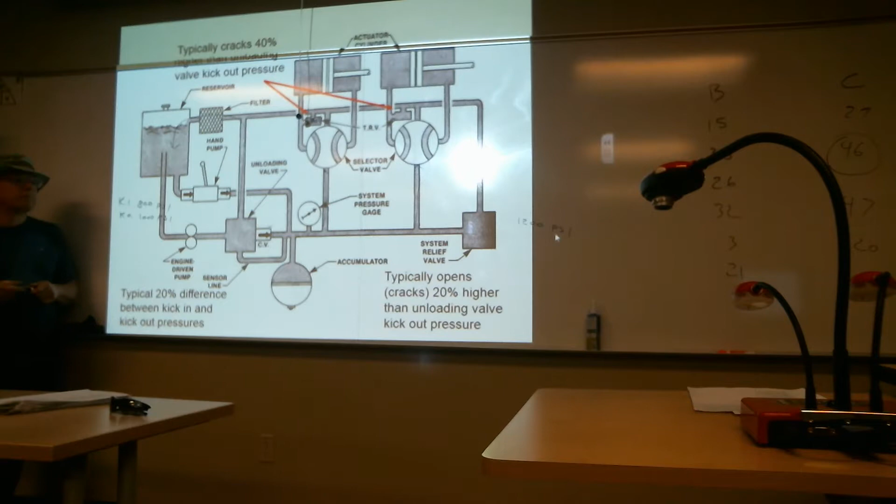Does the relief valve control system pressure? The answer is yes, it could. But does the relief valve unload the pump? No. So when the relief valve is controlling pressure because the unloading valve has failed, the answer is no. It will control pressure to a higher value, but it does not unload the pump. And that's really the important thing with high pressure systems. We have to find a way to control the discharge of the pump.

What do they do on electrically controlled systems or electric pump systems? They'll use a pressure switch in order to control the pump. But it's done indirectly. Really, the pressure builds up, cuts off the electric motor, and that controls system pressure. Will they still have a relief valve in the circuit as a backup? Yes. So if the switch contacts on a pressure switch fail in the closed position, you're still going to have something that will control the ultimate system pressure. Would that relief valve really work for a long period of time? No. It's a stopgap, just to prevent the system from blowing itself up.

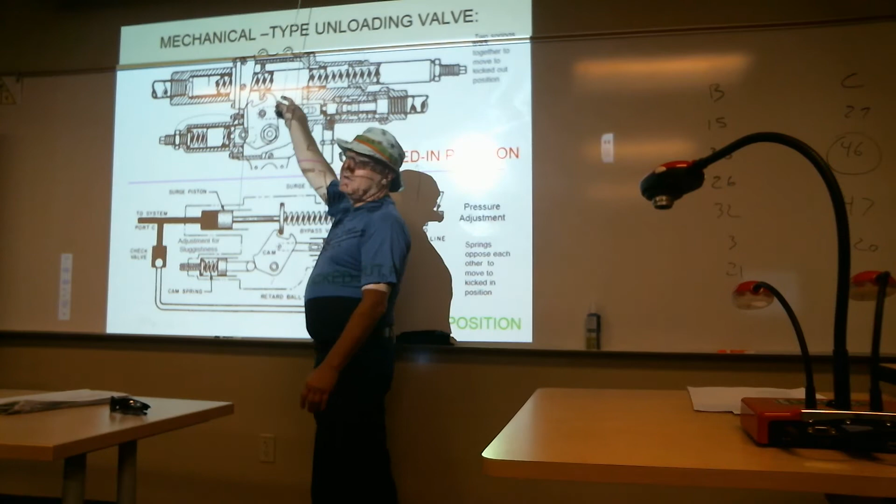Let's talk about different types of unloading valves. You are probably never going to see this particular type of unloading valve. It's a purely mechanical type of unloading valve. It's got a lot of piece parts in it. It's considered to be too complex by today's standards. But this shows you the internal piece parts of that mechanical type of unloading valve. You've got a plunger or a piston inside of it that sees system pressure.

You've got a big spring behind it that the system pressure has to work against. You've got a check valve that isolates the reservoir and traps system pressure on one side of the unloading valve. You've also got a cam, with a high spot on the cam, and the cam is loaded against a follower with a spring on the other side of it. The pivot point for the cam is located here.

This position of the unloading valve shows you what they call the kicked out position. What that means is we've trapped pressure in the accumulator. Any flow being delivered from the pump is diverted back to the reservoir. So we've got a flow path that comes in from the pump, it goes around this valve that they call a bypass valve, and it goes back to the reservoir.

Until the pressure drops off behind this piston enough, we're going to continue to have the flow being sent back to the reservoir. If the pressure drops off in this line, the spring pushes the piston back, and the cam is now positioned on the other side of the hump, of the high spot. This little connecting part attached to the spring will ride over to the other side, just like you see over here.

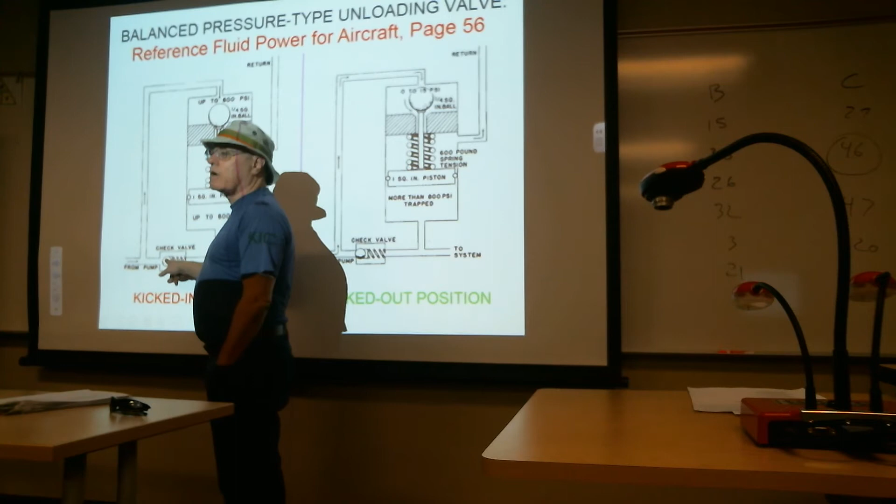What they're telling you is that for pressures underneath 800 psi in the system circuit, the unloading valve will stay in the kicked in position. So what we're doing is allowing the flow from the pump to go past an internal check valve inside of the unloading valve, and then the fluid flow from the pump is being diverted into the accumulator.

As we begin to build pressure, you'll have a pressure that's forcing this piston up. But what they're telling you is until we reach about 800 psi, there's not enough pressure or force in order to compress the spring. So we continue to build pressure.

What's also happening at this time? The pump is displacing fluid into the accumulator. The fluid flow from the pump, at whatever pressure is created at a given time, is also working on the surface area of this exposed ball that's inside of the unloading valve.

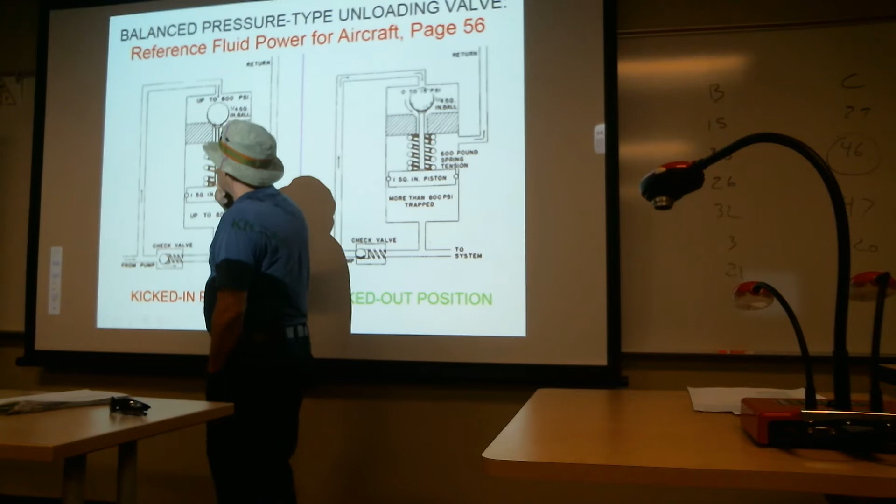So what we can take a look at is this: we've got a certain force that is holding this ball down on top of its seat. We've also got another force that is pushing down as well, which is the spring. We've got another force that is working this way against the piston. So we have one force pushing down against the ball, another force which is the spring pushing down, and one force that is pushing up against the piston.

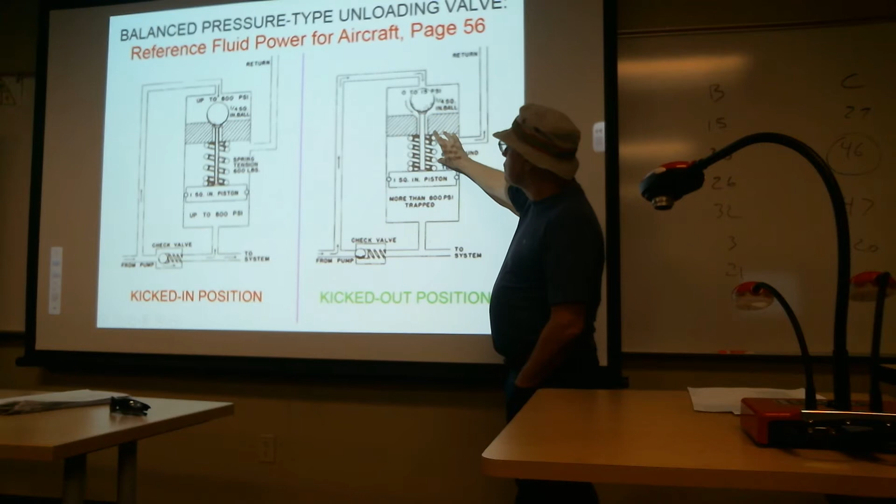Let's look to see what happens in this case when pressure goes up above a certain point. You've now got more force pushing up than you had pushing down. So in this case, let's just assume we get right to 800 psi. You've got 800 psi that is pushing up on top of the piston. The spring was worth a force of 600 pounds, but you can take a look at what was happening over in this position.

This has got a surface area of 1/4 square inch. What's 1/4 of 800? How much is that? 200. So here's 200 pounds of force, and here's another 600 pounds of force. We'll assume that we've got a total of 800 pounds that is pushing down.

In this case, you had 800 pounds that's pushing up. So it's kind of balanced. You're right at the teetering point of this thing, kind of going to the kicked out position.

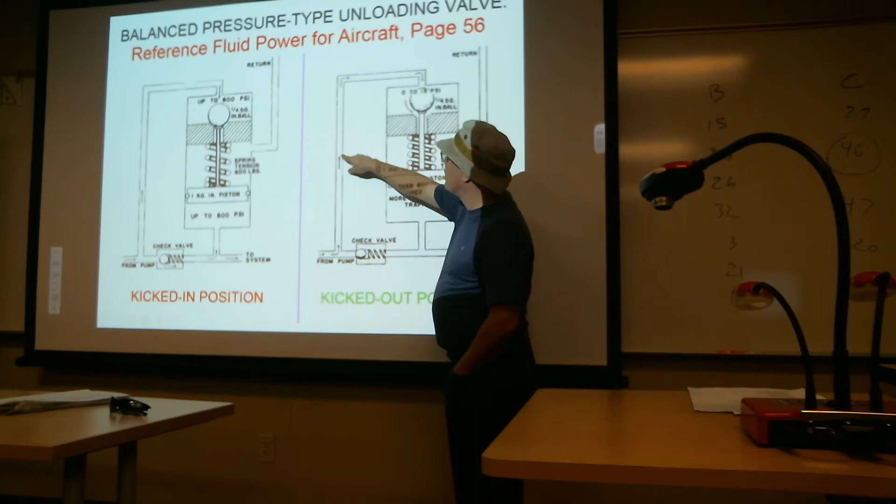As soon as you get to a slightly higher amount of pressure, the piston is pushed up, the ball has been pushed off of its seat by this rod, but most importantly, you've lost the force that was holding this ball down against the seat. The fluid flow that was coming from the pump has got a way to pass around the ball and circulate back to the reservoir unrestricted. So now you've got a flow path that's going back to the reservoir, and you're in the kicked out position.

Well, when will the unloading valve go back to the kicked in position? We would have to drop the pressure in this chamber in order to allow this ball to come back down. But here's the interesting thing: in the picture they're showing you for kicked out, you don't have any force that's pushing down on top of this ball. So you've got 800 pounds per square inch pushing up against 600 pounds pushing down. So I would ask you, what pressure would it have to drop off to in order to go back to the kicked in position?

600, very good. So even though we've got 800 PSI that's been trapped in here, what you've done is you've unbalanced it to the point where you've now taken the force off of the ball.

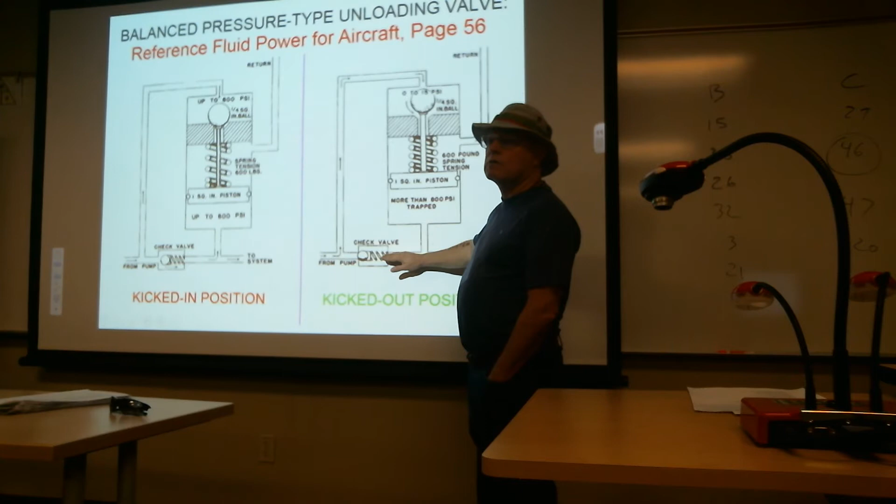What other component downstream of this is going to help you hold that pressure in the system? The accumulator. So when the pressure drops off to 600 PSI in the accumulator, or below that, the piston will come back down again, and then it'll go back to the kicked in position.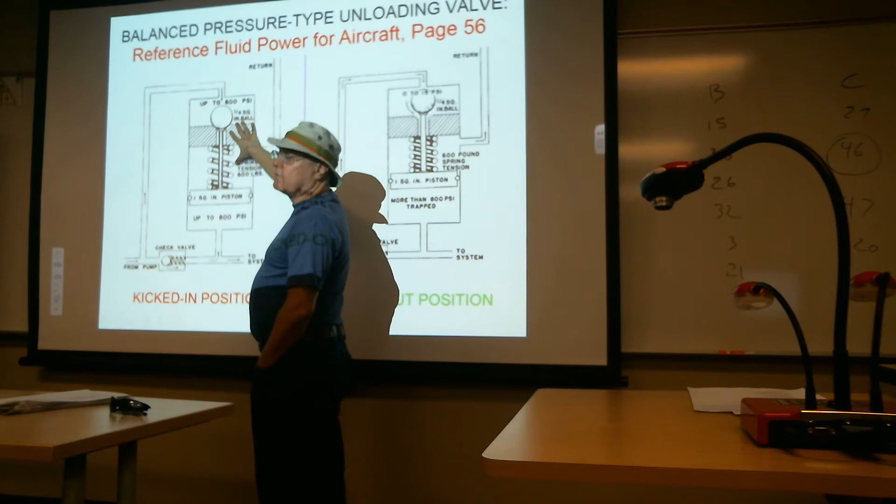So this is really the essence of what's happening in any type of balanced accumulator. You're working against surface areas that are in check against each other. In this case, you've got 800 pounds on one side of the piston balanced against a combined force of 800 pounds on two items. When we go to the kicked out position, you've now somewhat unbalanced it to the point where you've got more force on one side than the combined force trying to push it back down again. Do y'all kind of see what's happening?

Okay, so that's the kicked in and kicked out position. And that differential, in this case 600 to 800, that 200 PSI, what helps you hold that for an extended period of time is really the accumulator that is mounted downstream of the unloading valve.

Another picture, this one came out of one of the military manuals, but they didn't assign any generic values to the surface areas or the tension or compression on the spring, but you can kind of see how it works. Here's another one, same idea.

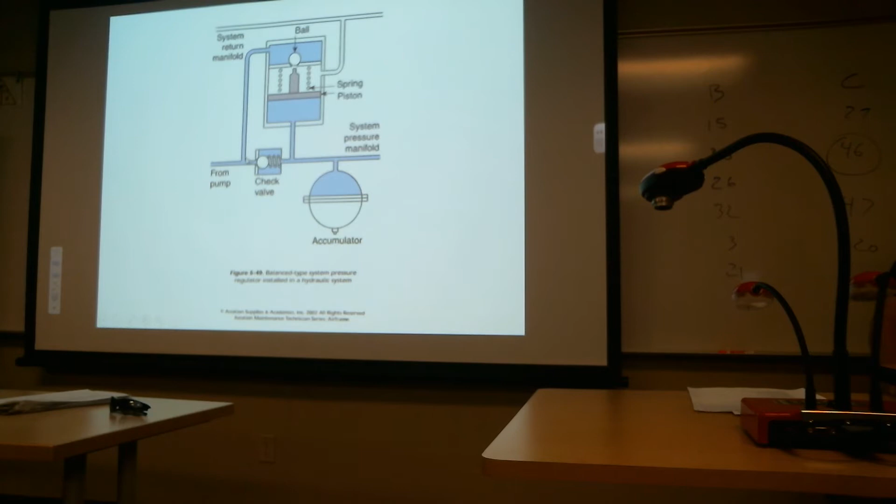This one shows you a check valve, but in many cases the check valve is integrated inside of the unloading valve. In the kicked out position, the check valve will be closed.

You're still working against surface areas in order to go from kick in to kick out, but it's not really apparent. When you take a look at that generic picture I just showed you, you can easily see your balancing forces. But the same thing is kind of occurring inside of the Vickers unloading valve.

So almost every unloading valve that I'm aware of is going to have to have at least an inlet, an outlet, and a port that goes back to the reservoir.

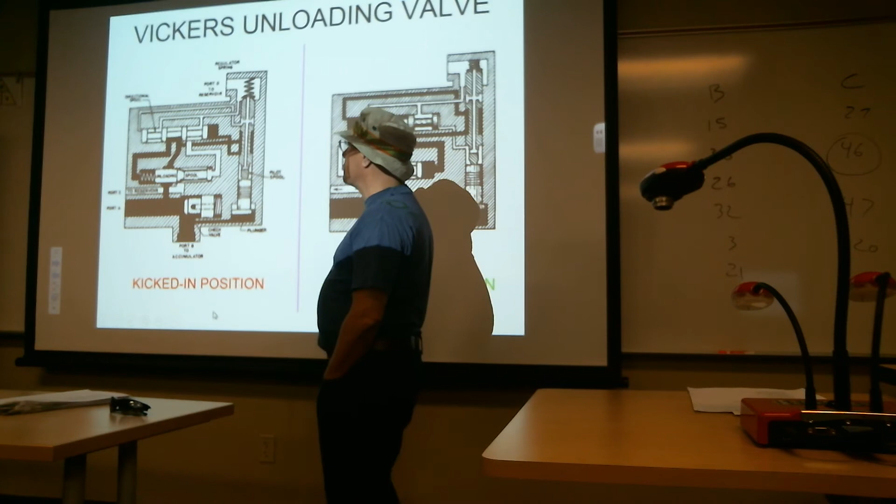The pilot spool has internal pathways or passages inside of it, and it's also got land areas. What we do in this case is divert some of the flow from the pump that's going around a hump of the unloading spool. It's going through a couple of areas of the directional spool, helping hold the unloading spool in position to the right. It's also finding a pathway through the land area of the directional spool and pilot valve, pushing or holding the directional spool in that position.

Everything is now set up for kicked in. So again, until we build up to a certain point in pressure to cause this plunger to be pushed up, we're now filling the accumulator with fluid and building pressure on the circuit.

Eventually, what happens is we reach a tipping point where we go to kicked out. This plunger is going to be pushed up. This now pushes the pilot valve up, and that changes the flow path being provided to the directional spool. You can see what happens - the flow now being directed to the pilot valve is coming around the bypass spool. It's going around this way, and it has now pushed the directional spool into that position.

The consequence of this is that the flow from the pump is now provided with a pathway back to the reservoir. So the pilot valve has switched positions, the directional spool has swapped positions, and now we've forced or biased the unloading spool or bypass spool over to the left. That provides a path for the pump discharge to be sent directly back to the reservoir. So in theory, you've taken the load off of the pump.

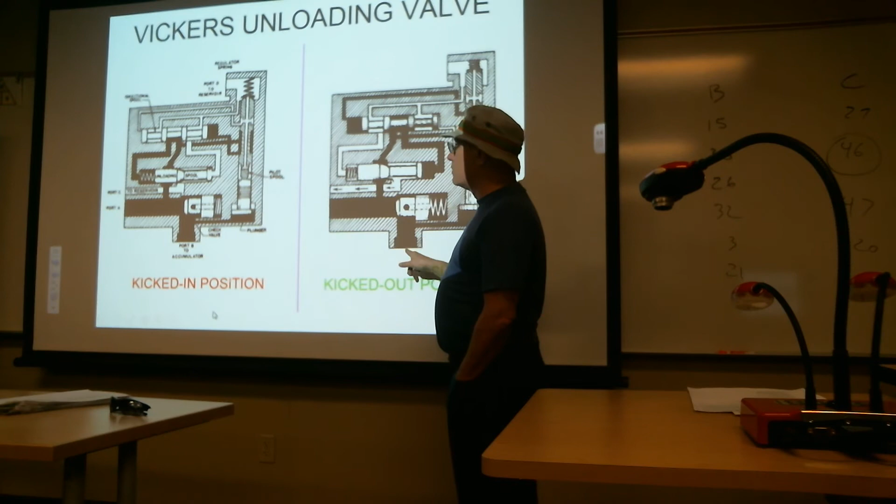As long as the accumulator maintains enough pressure to hold this plunger up, you're going to stay in the kicked out position. You start to bleed off pressure from the accumulator by using a component. The plunger eventually comes back down again. The check valve will open and deliver flow into the circuit, and we're going to build pressure back up again and eventually go back to kicked out. So it's kind of an interesting device.

With a lot of these unloading valves, there has to be a method for allowing these individual spools to move. So when we want to shift position from kick in to kick out, there was fluid already trapped on this side of it. How are you going to get rid of that? Well, there's usually in many of these unloading valves a port that goes back to the reservoir. This is what they commonly call a vent or a drain - specifically called a drain in the Vickers manual. The idea is, without that drain port attached to the unloading valve, there would be no way of venting or draining that fluid to allow motion for those individual spools to shift position.

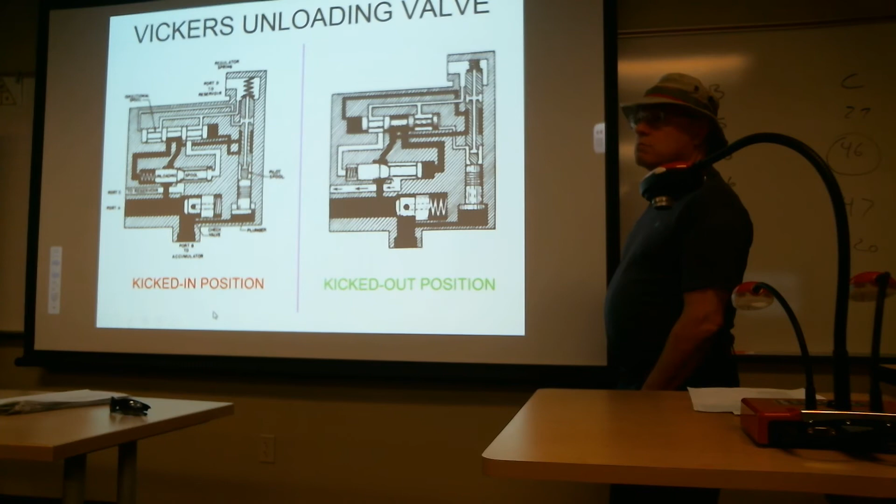You know that liquids are considered to be what? Incompressible - very good, you've read my mind. So if you can't make the individual spools move to the new commanded position, they'll stay in the position they were in. The purpose of that drain port is to prevent what we call hydrostatic lock. It allows that fluid to circulate back to the reservoir so you can shift position, either from kick in to kick out or from kick out back to kick in again. So that's what it does.

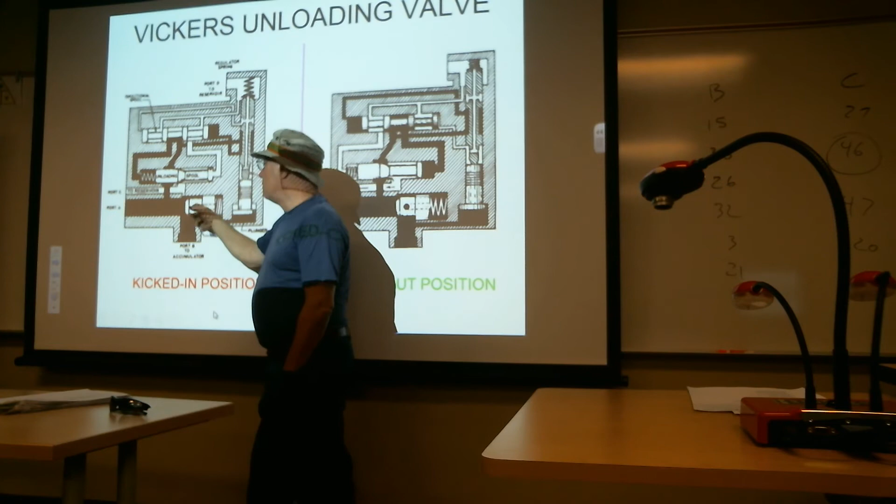Notice some interesting things too about the way it has to work. In any unloading valve, you've got common components: you'll have a check valve, something that will work as a pilot valve, and something that will work as an unloading valve or bypass spool. In the kicked in position, the flow from the pump pushes the check valve back and the accumulator is filled with fluid. At the same time, the bypass spool is closed and no fluid goes back to the reservoir.

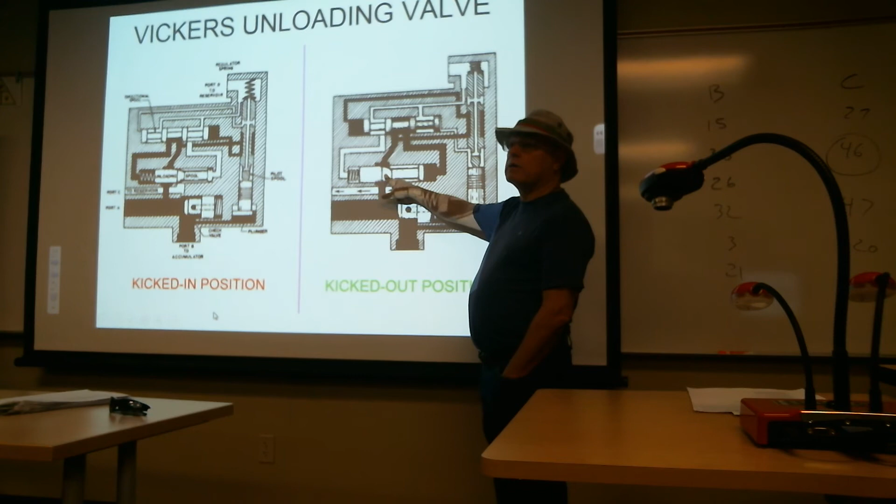So if I were to ask you the position of particular valves or components inside the unloading valve: in the kick-in position, the check valve is open and the accumulator is being filled with fluid under pressure. At the same time, the bypass spool is closed, and no fluid flow from the pump is going back to the reservoir. If we look at what's happening in the kicked out position, the accumulator is holding this check valve closed, aiding the spring, so the check valve is closed, but the bypass spool is open. The fluid flow from the pump is finding a return pathway back to the reservoir. So check valve is closed, bypass spool is open.

Adjustments, well, bench adjustments, if you had to make an adjustment for minor variations of that spring compression, the Vickers unloading valve provides for the installation of shims that are underneath the cap. So if you have to make a minor adjustment for kick in and kick out, what you can do is add and remove shims as required in order to make minor adjustments. This is a bench adjustment, by the way, too.

You'll notice that there are different part numbers of unloading valves, and whatever part number you have is pretty much guided by the type of, or the compression of, the existing spring that you have in the unloading valve. But we can't precisely control kick in and kick out just by a mechanical spring. So to provide for minor variations in compression, they allow an adjustment by the addition of a shim.

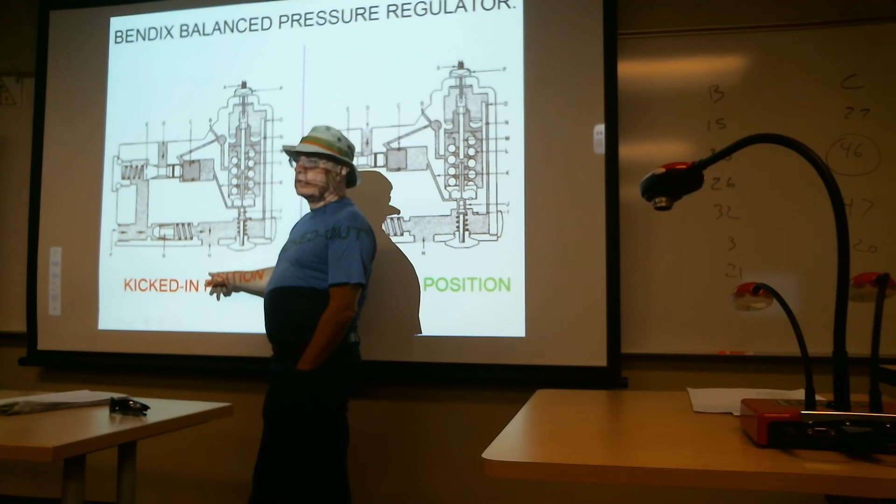Accumulating, okay? The bypass spool, the fluid flow from the pump, can it get by the bypass spool? No, so the reservoir is cut off. So we're in a position for buildup of system pressure. In this position, called kicked out, the check valve is closed. That means we've trapped fluid in the accumulator. There was enough pressure to raise this pilot valve in order to cause the bypass spool or unloading spool to open. And the fluid flow from the pump is circulating around the waist area of the bypass spool and it's going back to the reservoir.

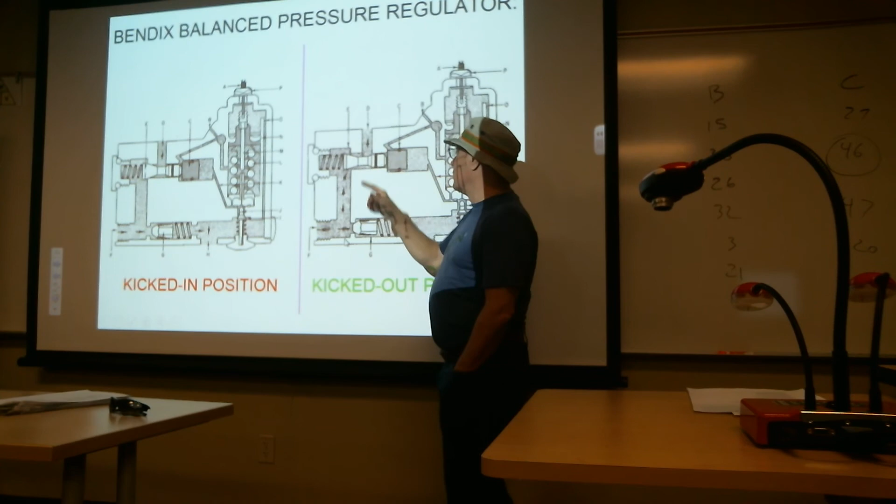But again, that's kind of the way most of the unloading valves have to function. The spring that's on the inside of it, same thing as what you found inside of the Vickers type unloading valve, works against system pressure. You still have to have something that manipulates the bypass spool, but again, very similar to what you had in the Vickers.

Be aware too, read the manual. Sometimes the adjusting screw, you would think by turning the screw clockwise that you might be increasing the kick in and kick out, not necessarily so. So just be aware that turning it one way or the other might do what you don't want to have happen. Adjustment on this type of regulator.

Troubleshooting. I cover this pretty much in the checkout for the unloading valve and the relief valve. But regardless of the type of unloading valve that you have, there are some things that are kind of common to its operation. And if certain symptoms occur, regardless of the type of unloading valve, they can pretty much be traced down to the same thing.

So let's take a look at chattering first. Well, I've got low reservoir level. The chattering inside of an unloading valve might be due to the check valve moving back and forth too rapidly. Port A in the illustration is the port that comes from the pump. If the reservoir level is low, you're going to be swallowing not only fluid, but also gulps of air from the reservoir being low. Every time a gulp of air goes by that check valve, it's going to slam itself shut. So the first thing I'm going to check in the event you hear that chattering effect, I suspect it's going to be the check valve. What's wrong is the fluid level on the reservoir is really low.

So again, before you start looking at the unloading valve itself, look at the symptom, what it's doing. This is a good example too. The symptom manifests itself inside of the unloading valve, but the problem isn't with that. The reservoir level was low. So chattering check valve, or chattering inside of the unloading valve, I suspect maybe the reservoir level is low. You're swallowing gulps of air that's causing the check valve to close itself off.

Unloading valve cycles itself too frequently. Well, it goes from kick out to kick in, to kick out and back to kick in. There should be a certain period of time for normal cycling, whatever it is. It might be a half hour with no components being actuated, or maybe 45 minutes, whatever it's supposed to be. But let's say it cycles more frequently from kick out back to kick in again, maybe in half the normal period of time. What I suspect then is you've lost the gas charge out of the accumulator. The device holding the unloading valve in the kicked out position was the accumulator. You have to bleed the fluid pressure off in the accumulator before it goes back to the kicked in position. So if the accumulator isn't functioning correctly, it'll cycle back to kicked in and eventually kick itself back out again. So check the accumulator before you do anything else.

So another thing you might want to think about — what is the normal cycle time? Well, that varies. This is a good thing to know for a particular aircraft. What is considered the normal cycle time? Maybe the service manual might tell you what the normal cycle time should be. So you might want to investigate there.

Accumulator doesn't charge with pressure. You've got zero system pressure. Well, if you can't get fluid into the accumulator, that means the unloading valve is somehow bypassing fluid. What was holding the unloading valve in the kicked in position? You've got this big spring inside of it. Well, maybe somebody forgot to install that spring. If there's no spring inside of the unloading valve, the pilot valve is able to shift itself fully up, and immediately you'll go to the bypass position. So no fluid flow ever makes its way into the accumulator. All of the fluid flow is being diverted by the unloading valve back to the reservoir. It's possible you've got no spring inside of it, okay?

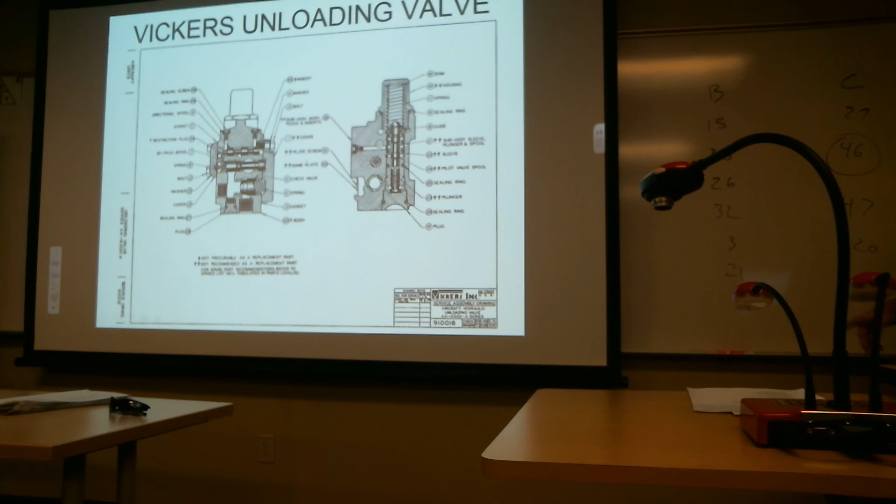Well, another thing too, maybe somebody has adjusted the relief valve in the hydraulic circuit so that it's completely open. They backed off the big screw on the back of that ball, and again the fluid is bypassing back to the reservoir, so that might be another thing too. What I'm trying to tell you is you can't trap any pressure in the pressure manifold. But again, you might want to take a look at the spring — is it there or not? Maybe the relief valve is in fact in the open position. That might have done it too.

Okay, let's take a look at another thing — early kick in. Well, this is a little bit different than...